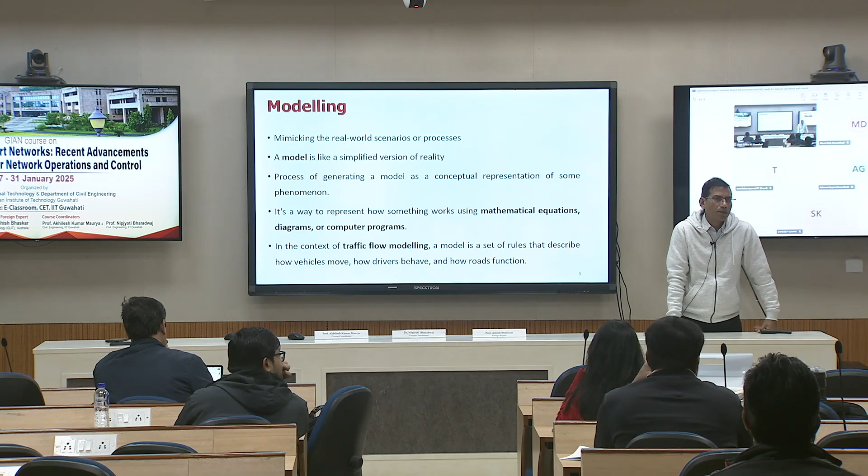Now the next question comes: if this is modeling, then what is simulation? Because these words sometimes come together or separately, but most of you, if you are aware of models, always encounter the word simulation as well. Yeah, one by one. Yeah, please. This is also a virtual environment, or maybe, I don't know, do you consider a computer model virtual or physical? The form of animation, but here in modeling, we mostly solve mathematical equations.

So modeling, even physical modeling also might be modeling. So simulation, you are saying, we do in the virtual world. Virtually, we solve the problem by defining the environment perfectly. And mathematically also, whatever model we describe, the same definition. So what is the difference? The first question is whether modeling and simulation are different or the same. If they are different, what is the difference? Testing the model. Using the model is

Maybe okay. Yeah, madam. Many of these are not working, I think charging is not there or something. So even these two are not working. Maybe you can just check. So

Testing the model. Okay. Anybody else? Basically applying it so many times that we get results that are real time. That is calibration, not simulation. It's like you want to fine tune your model so that it matches. Create some conditions similar to the real world so that the model works well. So that is the model also. If it is not mimicking the real world, then it is not a model. Yeah, but the external conditions will be given to that. That is simulation, like traffic flow propagation. Okay. Anybody else want to answer?

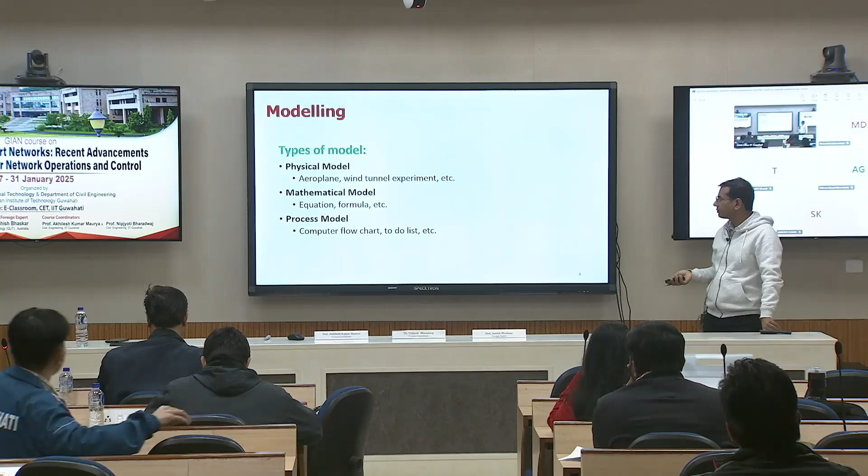Then mathematical model: you are very much aware that all this traffic flow modeling is nothing but mathematical modeling. Then process modeling. Whatever coding steps can be another model, but that is in the form of flowcharts and rules. Sometimes your model may not be either of them, but a combination of those, some physical, some mathematical, both together. But our traffic flow model mostly belongs to mathematical models, where we mathematically try to develop some kind of relationship between different components of the system.

What are the three components of the traffic system? Driver, roads, and vehicle. So how they interact with each other, we try to express in mathematical terms. That becomes our mathematical model.

So if you want to study a system, either you can experiment with the actual system and learn how the system is responding, or you can create a model and then experiment with it. If you are able to create a physical model, you experiment with the physical model, or you develop a mathematical model and then test that model in different scenarios. And these two terms will come back later.

Sometimes with this mathematical model you can easily get the answer by solving it with an analytical method, using some kind of analytical tools. But sometimes it is not possible. Why it is not possible, when it is not possible, and how simulation comes into the picture, that we'll try to see. We'll skip this. So we'll try to understand what simulation means.

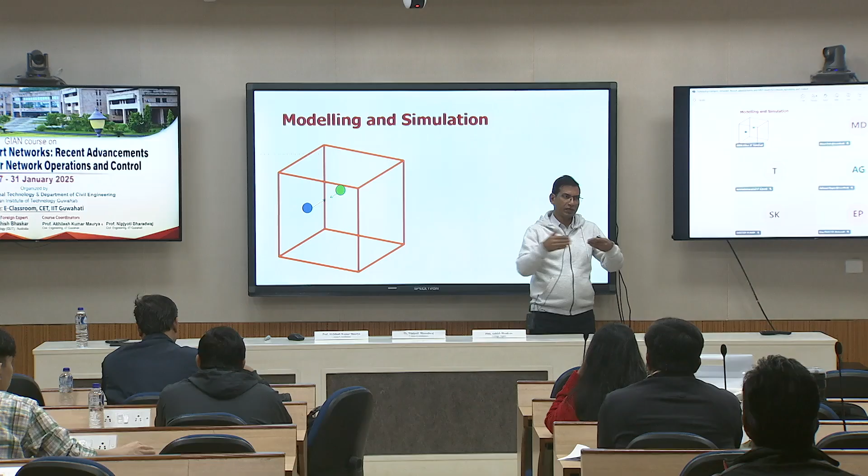Now, say this is a transparent box, all the sides of this box are perfectly elastic, and the elasticity coefficient is known. Even the balls' elasticity coefficient, initial position and speed are known. Now, if we shake this box by a known force, the balls will move, and they might collide with each other after some time and rebound back. How to get their position?

For that, well-known maths is available; dynamics equations are available. If you know the initial condition, we can figure it out very deterministically if all the parameters are known. So this is not a simulation, because here you are able to get the answers mathematically by directly solving these equations using an analytical method.

What will happen if we add a few more balls, maybe one more? Can we write equations for all three? We can. It's easy to write equations for three. If we add four, it's slightly difficult, because now there are too many permutations and combinations. They might collide with each other as well as with the box surface, so the number of equations is increasing. If we keep on adding more and more, then solving those equations all together

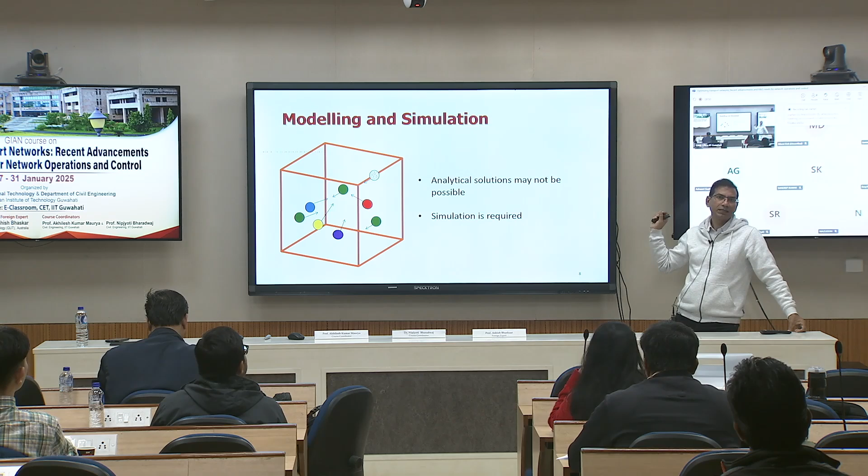Now if you consider the traffic system, we had three basic components: road, vehicle, and the driver. But it's not that only one vehicle, one driver, one road is there. There are thousands of vehicles simultaneously interacting with the road. Even the road neighborhood will keep changing. If you keep moving, your road surface will change, neighborhood conditions will change, shoulder dimensions will change, weather conditions might change if you travel larger distances,

or maybe the geometric design will change. So a lot of variability in terms of road, a lot of variability in your neighborhood, there might be different varieties of vehicles you will keep interacting with. So once the number becomes significantly high, you cannot solve those systems by analytical methods, and simulation becomes more realistic. And here visualization is another addition. You can visualize how the system is behaving, and then it becomes easier to appreciate.

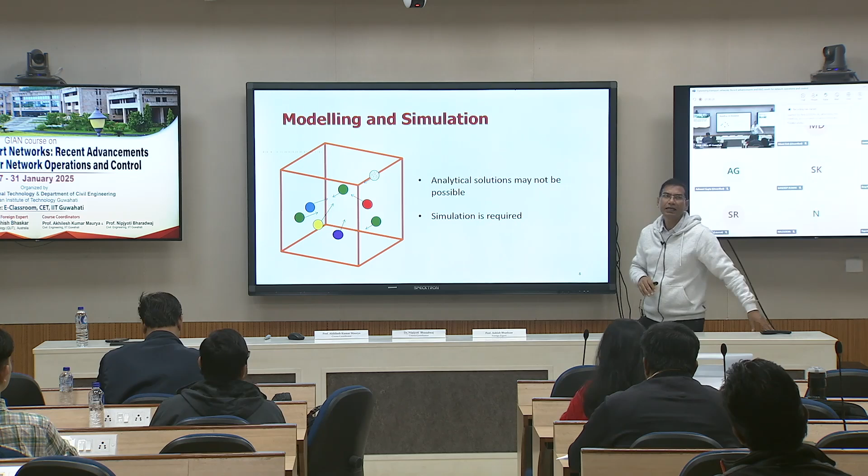If you see how vehicles are moving in a particular simulation model, you will be able to visually check whether the movement of vehicles is close to reality or not. If it is close to reality, you can believe that at least at first glance things are fine, vehicles are not running over one another, they are not taking abrupt lateral shifts. All those things can be very clear with the visuals. Okay.

Then these can be of different types. You can have a static system where behavior does not change. Whatever the behavior is initially, it will not change over time, it will remain the same. But you can have a dynamic system where things get changed, like the driver behavior may change, or the road surface keeps changing. So if a vehicle is moving at a mid-block section, as soon as it approaches the intersection, behavior might be different because the road component behavior has changed.

Then you can have deterministic and stochastic, discrete and continuous, we will talk about. So this is static and dynamic we have talked about. If any parameter keeps changing over time, then it becomes a dynamic system. Traffic is one such dynamic system. It's up to you what you are looking for, whether you are looking for the impact of road geometry, maybe a wide road, then a narrow road, and you want to study how congestion is forming. Then over time things will keep changing.

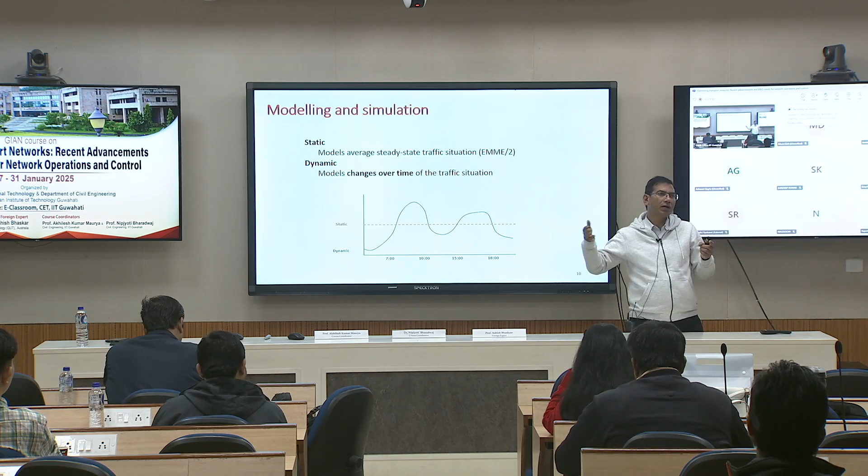Or maybe if you want to study driver behavior and aggressiveness, if it changes from morning to evening, that also you can incorporate, and over time you can see how much impact will happen because of the change in driver behavior. So then that becomes a dynamic system. Stochastic and deterministic: where you are able to predict the behavior very accurately, that becomes deterministic. Wherever that situation comes, the answer will remain the same.

But is the traffic system a deterministic system? No. Why is it not deterministic? Every second there is change. So which component is more responsible for that, out of the three components?

Vehicle may not be, because if you apply the same amount of pressure, most of the time the deceleration generated might remain the same. Over time, maybe over years, it may change, but not within hours. But driver behavior will definitely change, and the driver cannot have very precise perception.

If I ask 10 people how much distance there is from that place to this place, they will come up with 10 different answers, because that depends upon their perception capability, how accurately they are perceiving. If they are not able to perceive the distance accurately, how can you expect that they will react in a similar way? So based on their perception capability, their reaction will keep changing, and once you try to guess the distance, you know that you need to decelerate harder or maybe milder, but you don't know the exact value of how much pressure you need to give.

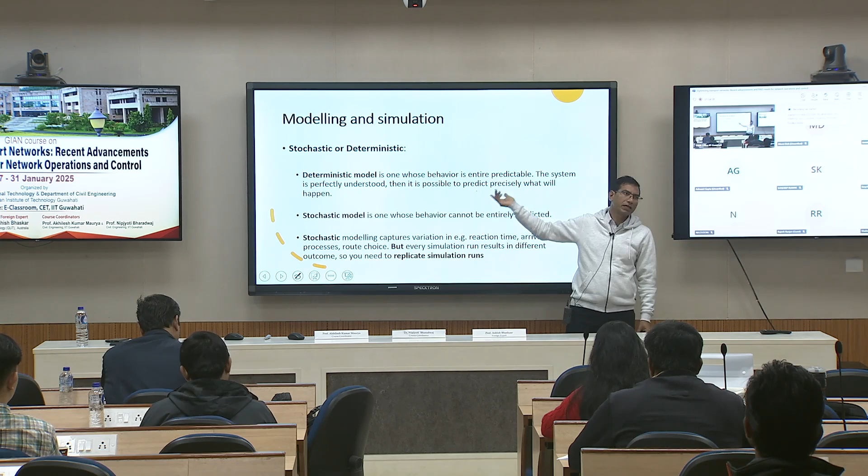When you try to press the accelerator, sometimes it might be slightly on the higher side, sometimes slightly on the lower side. So the idea of discussing this is that if you expose the same driver 10 different times to the same scenario, he might react differently. So it cannot be a deterministic model. Whatever model you are going to develop, if it has that kind of deterministic relationship, it is difficult to represent the real world traffic stream. It might represent it with a lot of simplification.

Then continuous and discrete. Sometimes if you want to simulate the traffic stream and your objective is just to get flow at a particular location, you may not require updating the vehicle position every 0.1 second. Maybe every 5 seconds or 10 seconds is also okay, unless you start introducing some kind of error into your system. In that case continuous evaluation of vehicle position you may not require. So you will update the system at discrete intervals of time, and your system becomes discrete in time.

It's like you are standing on top of a high-rise building and seeing the traffic stream. You are opening your eyes, seeing, and closing them for say half a second. Again you open. A vehicle is currently here; next time you open, it is here. Whatever happened in between may not be of your interest. But if you are studying an accident scenario, where everything happens within a fraction of a second, you might require even 0.01 second or whatever minimum is possible, because every moment is important. That will be more or less continuous, but here it might be discrete in time.

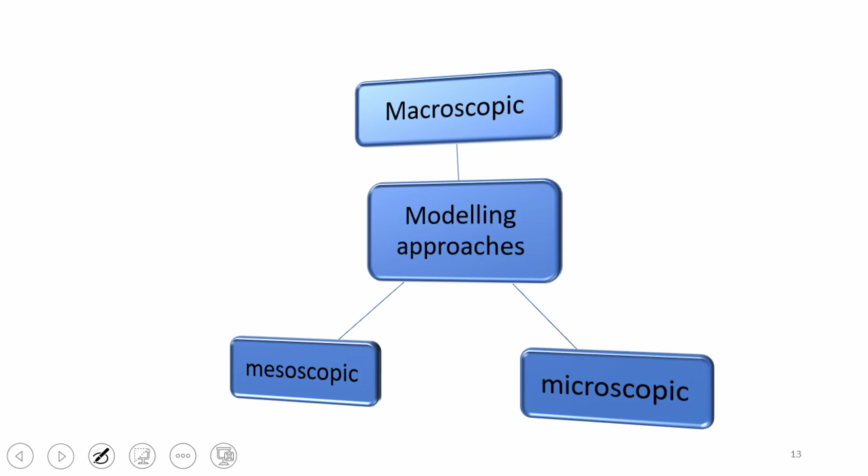Then, as Professor Bhaskar has already discussed, you have macroscopic, microscopic, mesoscopic; yesterday he talked about mesoscopic. When you look at a very aggregate level, seeing the traffic stream from an aeroplane or a very high-rise building where you cannot distinguish vehicle to vehicle interaction, you see a group of vehicles. Whatever parameters you observe there come under macroscopic. At the aggregate level you try to understand how vehicles behave: if density is high, whether speed is low or high. Acceleration and deceleration will not come here; mostly you talk about speed getting slower or higher.

Then at the micro level, you are standing just beside the vehicle and able to identify each and every vehicle's interaction: how much the gap is, what type of vehicle it is, whether it is accelerating or decelerating, the exact speed of that individual vehicle. All that information is known and you work with those parameters. That is the microscopic level. Most of today's class we will discuss the microscopic level, and sometimes you require even finer detail, for accident mechanism or accident reconstruction and how the vehicle is performing. The moment you press the accelerator, different in-vehicle processes might happen.

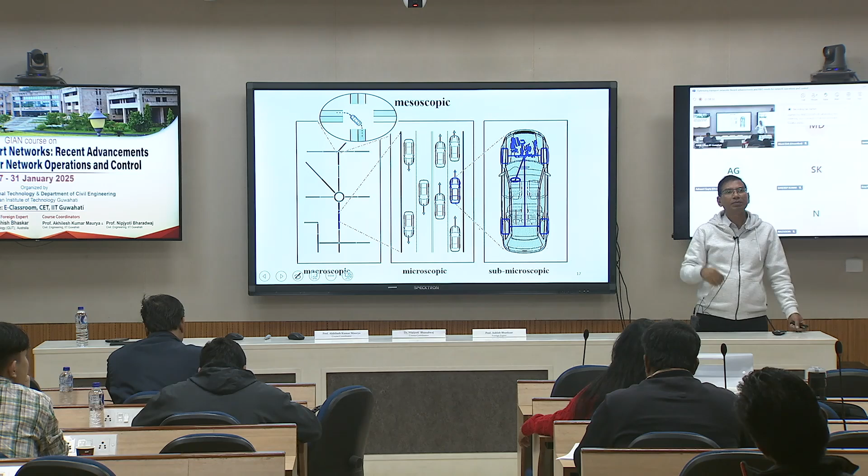Before actually that brake gets applied. So if you want to study that kind of system, within the vehicle itself, you will be studying many other components. So it becomes an even finer level. And mesoscopic is already known to you. It is in between macro and micro.

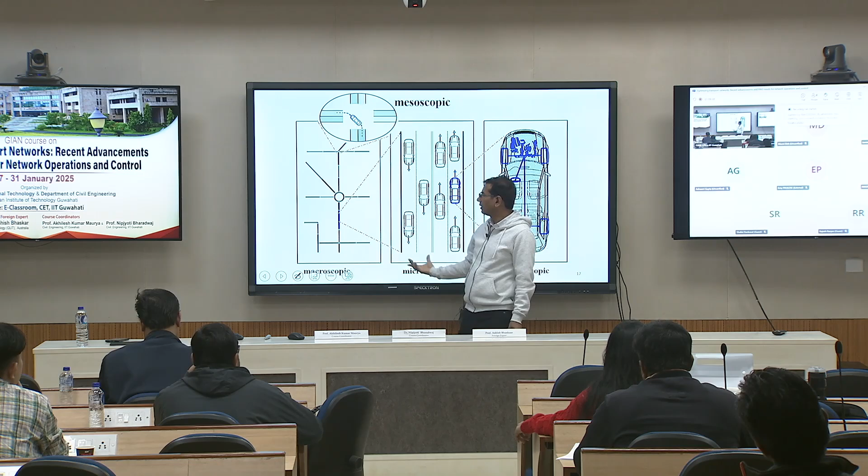Say you want to figure out only how many lane changes happen. You are not bothering about the individual vehicle, only the number of lane changes. Or at a particular intersection, what is the turning proportion, like left turning, through vehicles and right turning vehicles. For all those calculations at a moderate level, you may not require this much detail. You require slightly more than this. So then you go with mesoscopic.

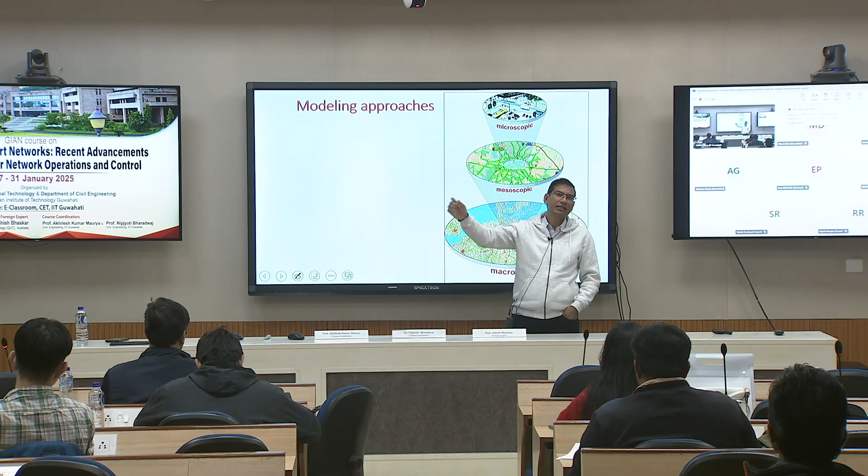Sir, what is the difference between simulation and forecasting? Simulation and forecasting. So you can use simulation to forecast. Forecast means you are interested in what is going to happen in the future up to a certain time, and that you can get using simulation, using mathematical equations, anything. So what is going to happen after a certain time interval in the future, what the scenario will be, that comes under forecast.

Is it that in forecasting, a researcher comes to know of a behavior which he may not know initially? I mean, the behavior may exist in actual reality, but since he may not be aware initially, he comes to know about it, and then he can test it in the field.

Yeah, normally if you are predicting the system behavior just after 1 second, that is actually not forecasting. We normally use forecasting once your time horizon is reasonably large, which you cannot easily anticipate. So then using some kind of properties, either using simulation or some kind of factor, you might be trying to predict what will happen in the future.

And mostly you can use forecasting for usual routine events and non-routine events. Say you see that on a particular link, this is the traffic today. Using a growth factor, you can figure out after 1 year, 2 years, what will be the appropriate flow values in that network.

So that is one. Another is, if you have a traffic condition prevailing right now, how fast congestion will occur, or if you are working on a signalized intersection, you might be interested in at what time the queue length will reach a particular threshold. That kind of thing can also come under forecasting, but short term. So does this answer your question?

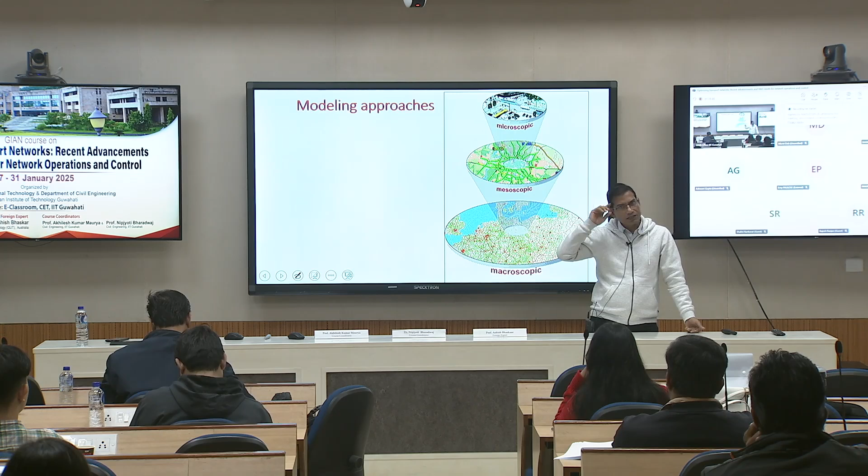So if he has to mimic the behavior, say an actor, if he has to copy a particular actor, he has to get his walking style, his speaking style, body movement. Unless he copies that, you will not identify him as that actor. So he has to copy those. Whether he is copying 2 factors or 10 factors or 20 factors, the realism depends upon how close it is. Thank you, sir.

Yeah. Any other question? Okay.

So this is well known. At the microscopic level, we have parameters like time headway, individual speed and distance headway, and at the macroscopic level we have flow rate, average stream speed, and density. So if we talk about the macroscopic level, which fundamental parameters do you think a driver might be able to perceive out of these three? Speed. This question is for non-IIT students. You people know, I know.

So these are three. Which one do you think people can perceive? Density. Okay, so he said density. Any other parameter? Speed. Speed. Okay. Flow rate. So once you are in a stream, which of these parameters can you guess, or perceive and react to? Flow rate also.

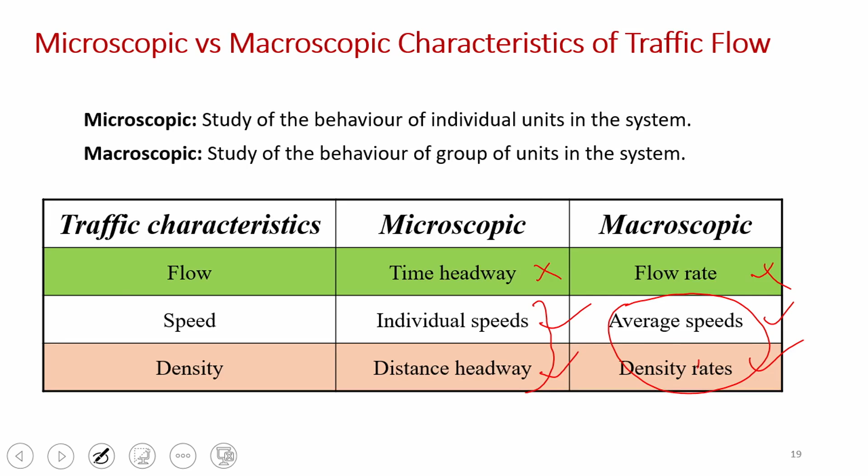Then, when the macroscopic relationship was being developed, people first plotted all the observed data between speed and density. They saw that an inverse relationship exists, and then a lot of models have been developed to fit that observed data. So there are a series of models; I had listed only a few. We'll not go into the macroscopic, but all the effort is how best you can fit this fundamental diagram. And this fundamental diagram is speed and density, because these two can be perceived by the driver. It's not speed and flow. Speed and flow derives later on.

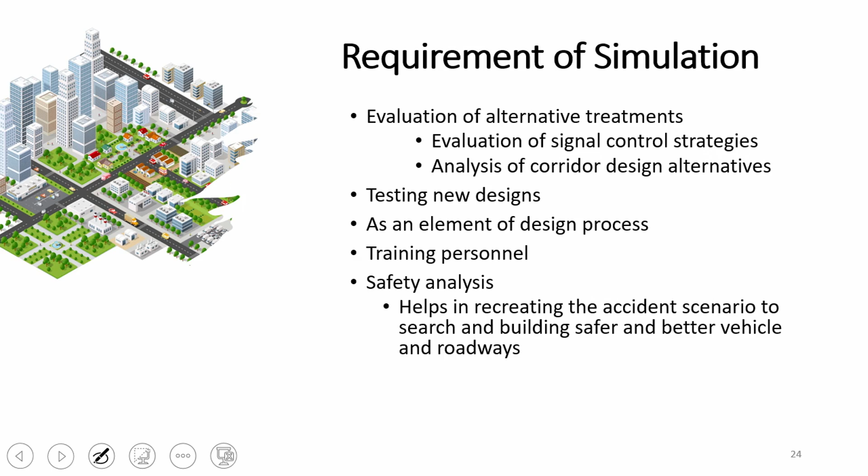Then why do we require simulation models? If you want to do some kind of treatment, say you had designed an intersection, you cannot install signals and see whether it is performing okay or not, or build a rotary and see whether it performs okay. So instead of physically building those structures, you need a simulation model where you can experiment. Or if you want to test some new innovative strategy, like innovative intersection designs where continuous movement happens without stopping, you cannot build them on the ground and test, because there might be risk involved. If an accident happens, who will take responsibility? So initially they get tested in a simulation environment, because you believe whatever relationships you built are realistic, so the results you get through simulation might be realistic.

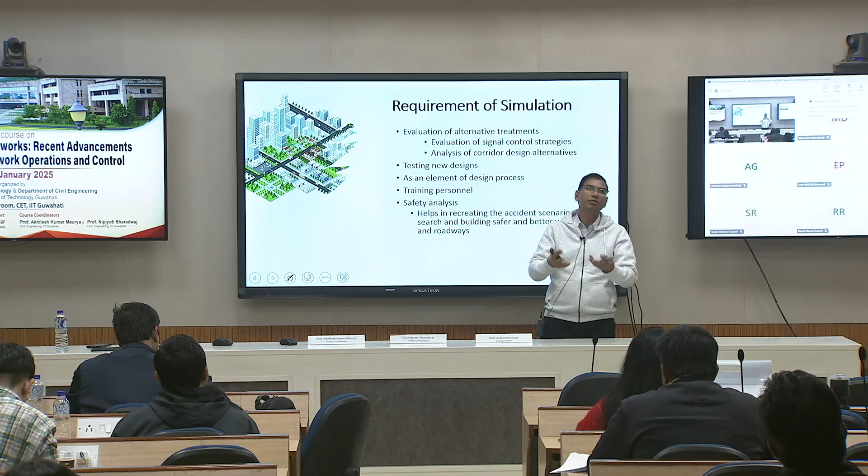Then many other things, like accident reconstruction, can be done through this, because once an accident happens, you cannot ask them to recollide and watch. And many times you don't have the video either. So how to know what the scenario was before the accident? Based on the data available, you try to guess the possible scenario and try to model that collision, and you check whether the outcome of the model is similar to what has been observed. If it matches the existing outcome, you can guess that your assumptions might be the real assumptions.

Okay, then before going into simulation, maybe we can see some videos of simulation, so that we can realize it.

There is no keyboard. So how to go back from the slide? Oh, the keyboard is there. Okay, thank you. Okay. No.

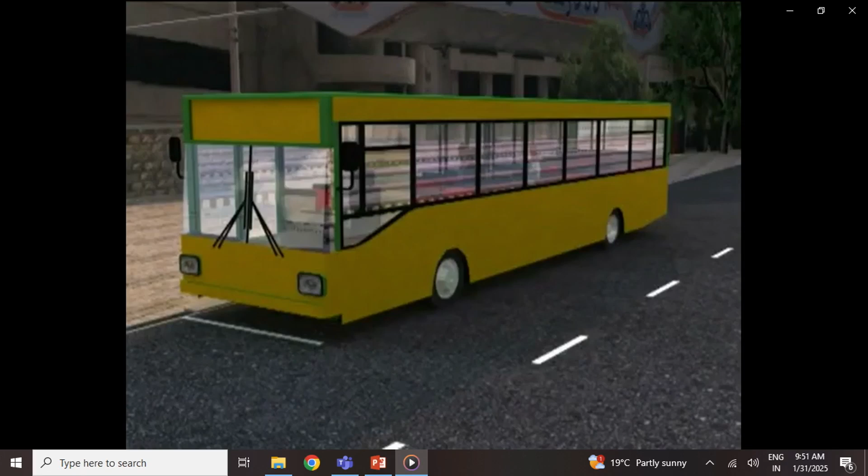So now this is the simulated network. This visualization helps you evaluate whether the relationships we built and the gap acceptance algorithms we included are appropriate or not, and then you can change the infrastructure and see whether you are able to increase the capacity. If we put BRTS in the middle or on the shoulder side, what kind of complexity are you going to face.

Okay. So how many of you are working in simulation? Maybe that experience is still there, no? You have not forgotten. So people who are working in simulation can very well connect with that. These videos are for those people who are not working in simulation, to show how your simulation animation will finally look if you do it for an entire network.

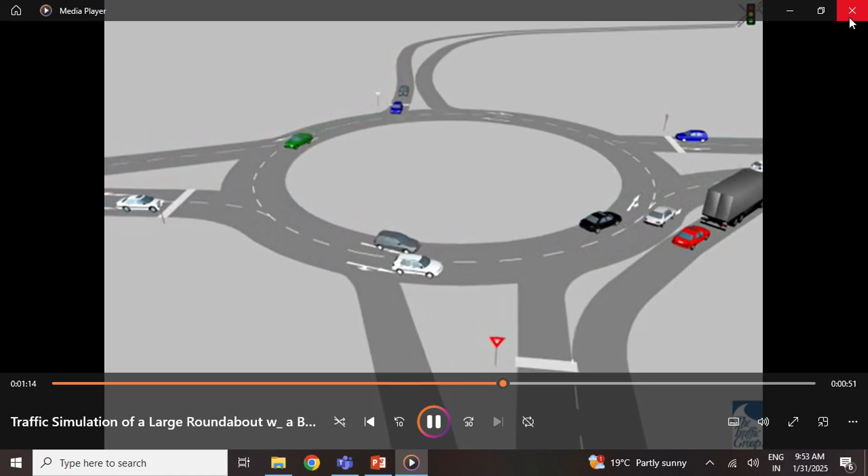Then we'll go to some other type of simulation, where they simulate a large roundabout. You can see how vehicles are flowing. All these are taken directly from VISSIM, so they might have a right-hand driving rule instead of left-hand. Okay, so this way you can easily figure out what could be the capacity of a roundabout at a particular location. But this is lane-based traffic. Similarly, we can develop the relationship for non-lane-based traffic also. So this is one example where you can have an Indian kind of traffic stream.

So the idea here is that if you see this kind of visuals, at least we can have some confidence that it's a little close to reality. Here cows and those things are not there, so you cannot have 100% reality, and there is no encroachment, which is another feature. And many times we blame that our road is narrow, but because of small patches of local encroachment, the capacity of the network goes very low.

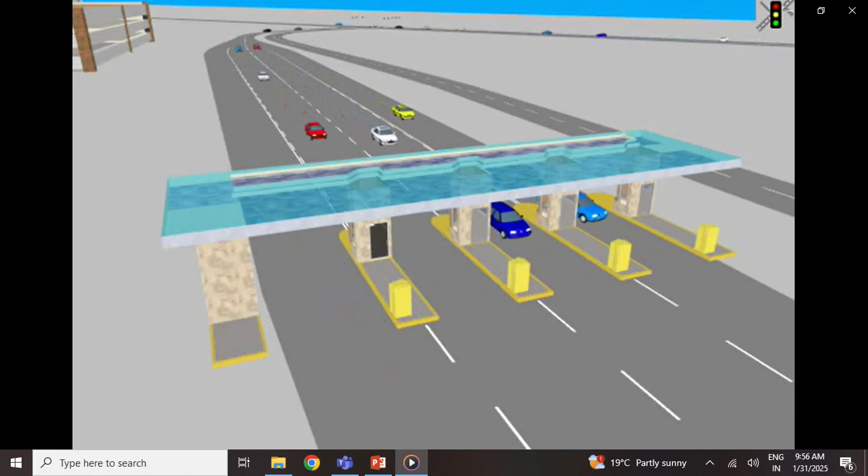Behind these visuals, rigorous mathematical equations are there, which will keep updating the vehicle position and keep deciding whether they will shift to lane 1, lane 2, lane 3, how far they will stop here. You need to have the real data from toll collection, like minimum how much time they take, maximum how much time they take, how it is distributed, and then randomly you are assigning the service time to each of these vehicles. So all those nitty-gritty details come from the field, and then this simulation will look like a real one. Otherwise it will not look real. It might look more like a game.

Okay. So the benefit is that if you had this, you can figure out whether 4 toll booths is correct, or you need 6 toll booths, without constructing on the ground. Maybe then we will have just the last one.

Okay. So with VISSIM, even if you want to calibrate VISSIM parameters, you need to have a separate tool where you will be changing the parameters and running VISSIM again and again, getting certain output, either in terms of speed distribution or travel time distribution, vehicle composition, traffic flow volume, and keep matching with the observed one. So until it starts matching the observed one, your calibration is not complete. So you need to do that iteration multiple times till you get your calibrated parameters.

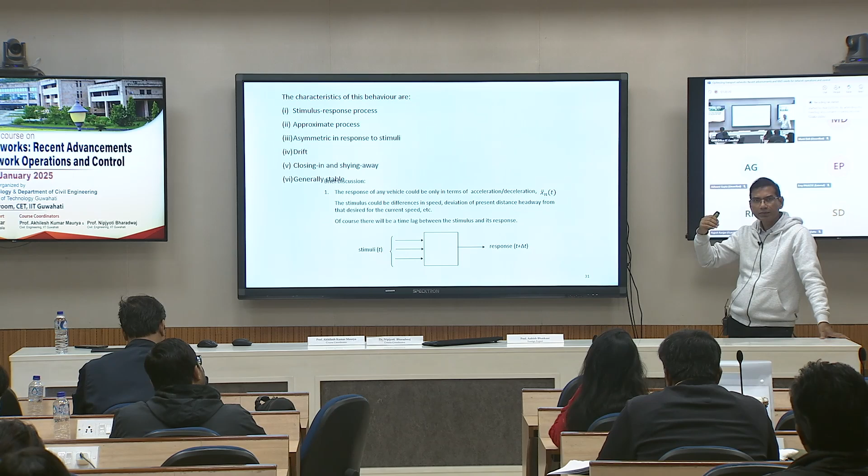So that kind of equation is very simple. Achieve your desired speed depending upon your aggressiveness level. If you are very aggressive, you will quickly achieve it, otherwise you will comfortably accelerate and achieve it. But in the other case, once another vehicle is there, that situation becomes a little bit complicated, and people have observed and listed these few behaviors which should be reflected in a real traffic stream.

The first thing is called the stimulus response process. This car following behavior is a stimulus response process, meaning you will keep observing some parameters and keep responding to them. So these parameters can be anything. These parameters can be your... just a minute.

So these parameters can be your distance headway, relative speed, next vehicle speed, anything. But you will be continuously perceiving that and reacting to that. But in this process, once you are perceiving some of the parameters and reacting to them, there will always be a delay. And that delay plays an important role: you will perceive, process it, react to it, so there will be a delay equivalent to your perception reaction time.

So every time, whatever parameter you observe, you will not react instantaneously. Your reaction will come after delta t time. So this is one clear behavior which any simulated model should reflect. Their reaction should not be immediate.

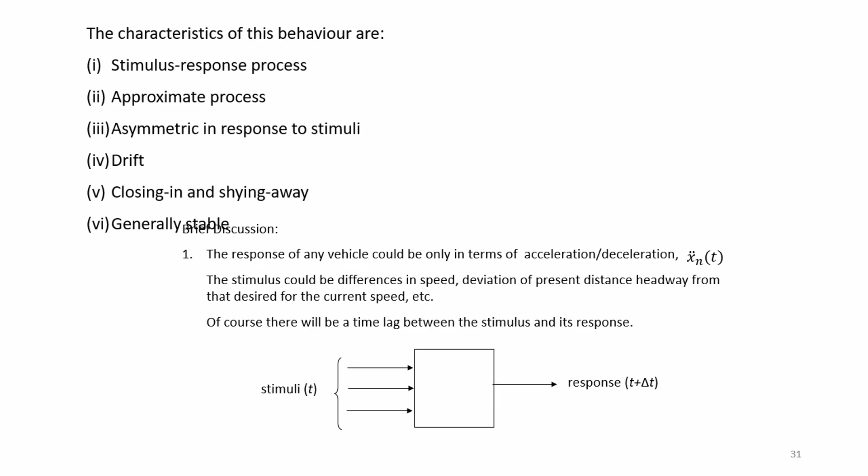So in that case, he will be perceiving the parameters and trying to react to them. And in this process, his perception will never be very deterministic. He will guess what the distance headway is. He will guess the relative speed, because he does not have any data on the speed of the leading vehicle. So it depends upon his guess whether the leading vehicle is accelerating or decelerating. That is why the brake light concept came, because if the leading vehicle is decelerating at a very small rate, like 0.5 meter per second square, you may not be able to perceive it unless you are very close.

But as soon as you start decelerating, your brake light is on. So that is additional information to the following driver that the leading vehicle is definitely decelerating. And once it's decelerating and you are moving at the same speed, it means that is a risky situation. If you don't do anything over time, you are going to hit that vehicle. So you get that kind of information, but you don't get at what rate it is decelerating.

Okay. So currently one debate is going on in the research community, whether we should have a variable brake light, some kind of indicator: 30% braking, 60% or 100%, depending upon brake intensity. But we don't know whether that is going to help the following driver or not. It might, it may not. So somebody can try this.

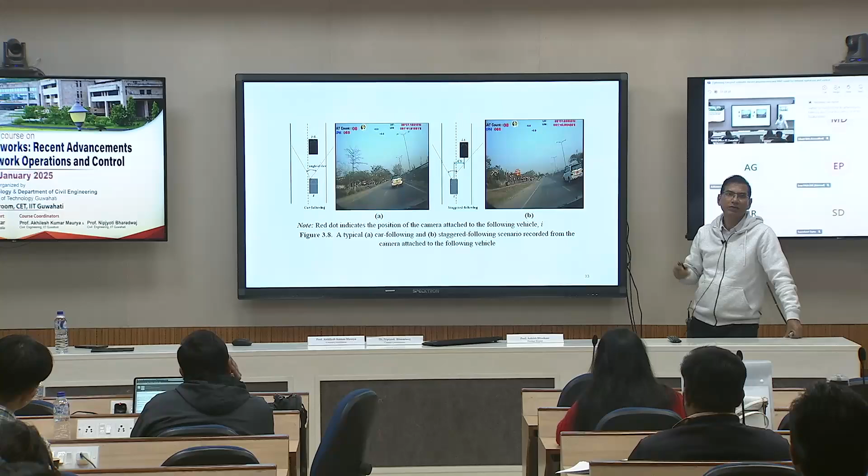So after some time it starts catching up. But there is a time difference, and that is actually perception reaction time. Similarly, if you see deceleration, the leading vehicle started decelerating, so that's why the relative speed becomes negative. So here, because it decelerated by a significantly large value, the following vehicle reacted quickly, but there is a time difference.

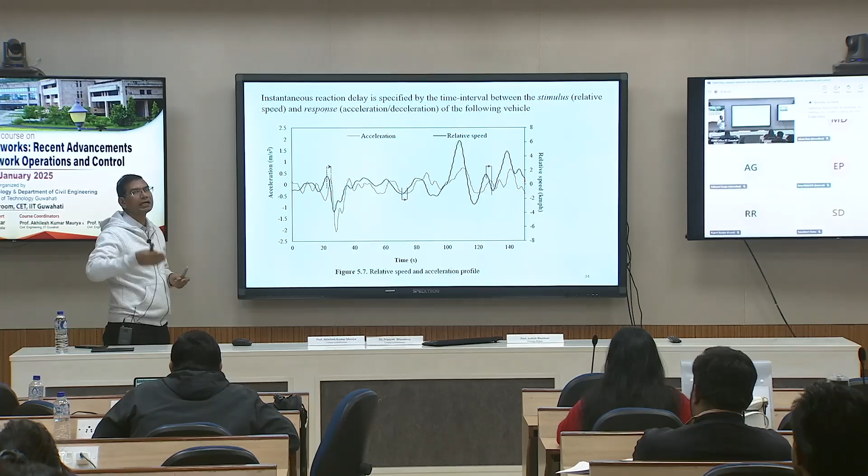So this is clearly observed if you draw these actions of the following vehicle and leading vehicle. From this time gap, you can figure out such instances, and you can figure out what is the reaction time of that driver. Okay, so these are a few values, we can skip this.

Then we are talking about the response to different stimuli, the driver response. If the leading vehicle is accelerating, the distance headway is increasing; in that case the response, versus if the leading vehicle is decelerating and your space is decreasing, that response. In both cases the response is not the same. Not the same, we are not talking in terms of magnitude, but in terms of sign: in one case you need to decelerate, in one case you need to accelerate.

Say the relative speed in one case is plus 10, meaning the leading vehicle is moving 10 meters per second or 10 kilometers per hour faster, and in the other case 10 kilometers per hour slower. In both cases the magnitude of the way you react will not be the same. Once the relative speed is negative, you will react harder, because you are going to hit that vehicle. So here you will be more sensitive, you will act quickly, and at the same time you will react harder, versus when it is moving faster.

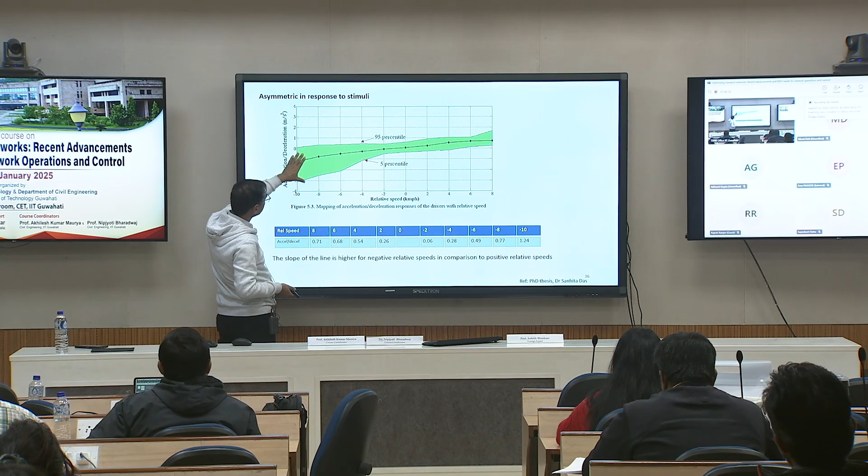So with the relative speed in the same experiment, we try to figure out the following vehicle's response, acceleration and deceleration. Here you could see a similar kind of relative speed. In one case, when it is -8, the response changes from this range to this range. When it becomes +8, the response is much smaller, because why aggressively accelerate? We may not feel that kind of urgency. Even if we accelerate comfortably, nothing is going to happen.

And this is the real behavior you will observe: in the deceleration case, or in cases where space is going to decrease and create a threat to your safety, you will be more active. It is even observed, if you noticed in that graph, that in deceleration the reaction time is small. The driver reacts more quickly in the space decrement case than in the acceleration case. So these are some of the observed facts from the real stream, which the model you are going to use to simulate should also reflect.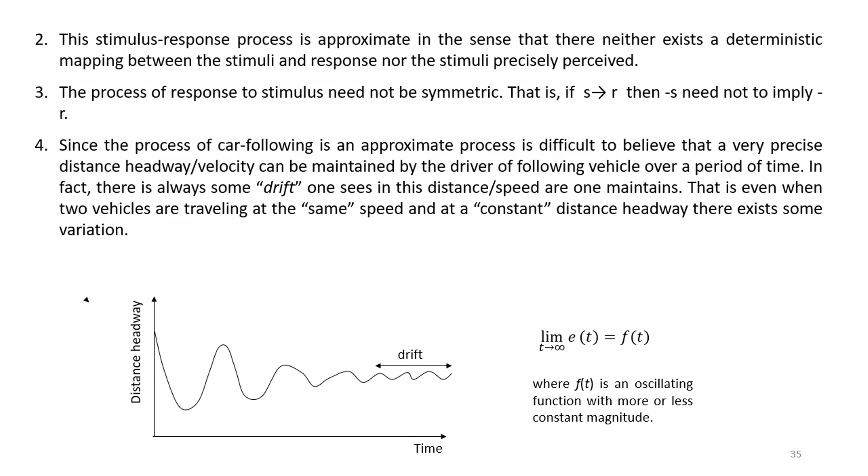Then, one more important parameter is drift behavior. If you ask two vehicles to follow each other, suppose the leading vehicle's speed is somehow fixed, by some mechanical means, so this vehicle is moving at 40 km per hour. Now you ask the following vehicle to maintain the same speed. What will be the scenario? What speed will he be moving at over time? The leading vehicle is fixed at 40, and the following vehicle is manually driven. What will be his speed?

Less than 40? If it is less than 40, then the distance will keep on increasing, so over time it becomes 500 meters and 1 kilometer. What's the objective? You have to follow the vehicle. The leading vehicle is moving at 40, and 40 is obviously not your highest speed; your highest speed might be 80. Whenever you get the opportunity, it is anticipated that you will try to achieve that highest speed. So in that experiment the leading vehicle speed is fixed, it's not changing. The question is, what will be the following vehicle's response? At what speed should it move?

Sometimes less, sometimes more than 40. Sometimes if it is traveling at less than 40 and the distance is more, then the speed will be more than 40 so that it can overcome that distance. Never cross 40? If it never crosses 40, then the gap increases. It will oscillate for sure. So it will oscillate like this.

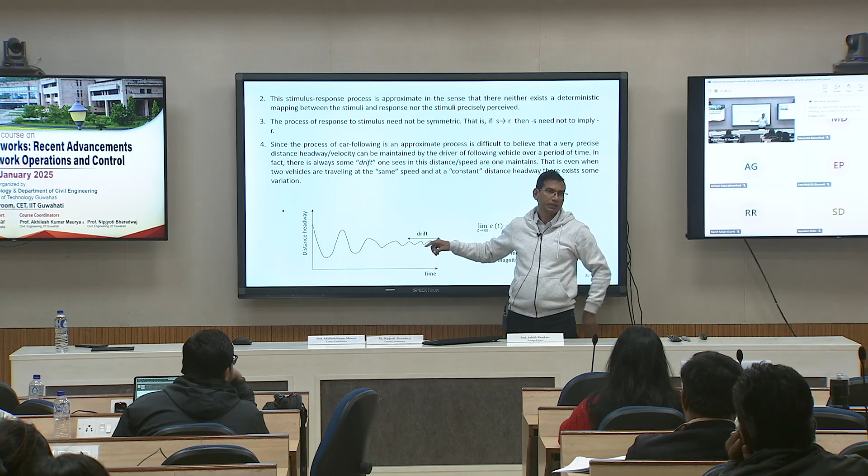So you will try to maintain an average speed of 40. But in order to maintain that average speed of 40, because again you are human, if you feel that the distance is increasing, you know that now you are moving slower. So you will accelerate. But you don't know when your speed becomes exactly 40. So you might go to 41, 42 and then you will see that the distance has been reduced. Again you start decelerating. So your average speed might be 40 but you might be ranging from 38 to 42 or maybe 35 to 45 depending upon your perception capability.

So this variation will be different for different persons. Somebody like a Formula 1 racer might be very much able to precisely figure out when he is moving faster and when he is moving slower. So he might be at maybe 39 to 41. But this band will always be there. This band they call drift. So here the following vehicle will never be at constant speed even though the leading vehicle is at constant speed. Some fluctuation will keep going on in reality, and that is because of the perception capability limitations of the human being. And we'll see that all of VISSIM is based on these perception capabilities, this fluctuation.

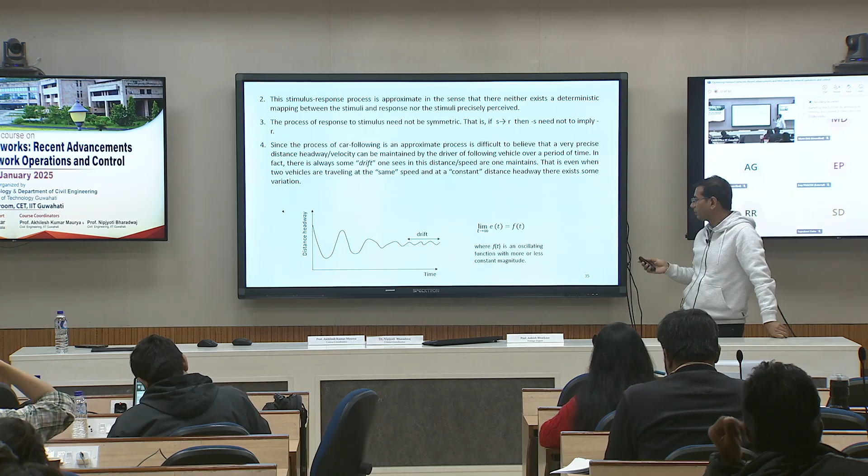So we all experience it, right? Yes. If you drive on highways, sometimes it might be milder. If you are moving at 80, this drift will be smaller because you are already at higher speed. There you don't mind even if the gap increases a little bit. But once you are constrained, you will desperately try to maximize the speed. So here drift will be higher. But this drift will be there. So maybe next time you drive, try to see whether that thing is happening or not. Then you will be able to correlate better.

Now we'll talk about some philosophy, which is actually the philosophy of VISSIM. Although we'll keep talking about VISSIM, it doesn't mean I am a VISSIM representative. I'm not from PTV. It's because we have worked more on VISSIM and we find it has better capability to represent the Indian traffic stream than AIMSUN and many others, which are more lane-based. So that is why you will frequently see the VISSIM name come up.

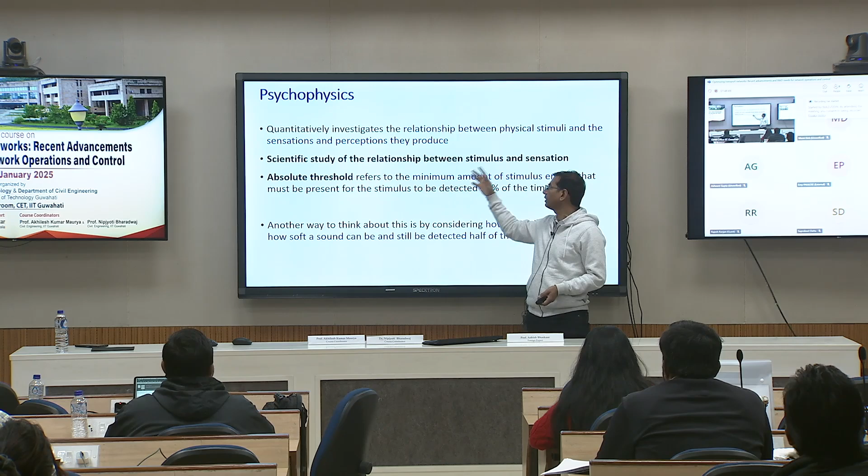There is a concept called psychophysics, which talks about the quantitative relationship between physical stimuli and sensation. This is a little different from whatever we are talking about in traffic flow. This is a kind of absolute threshold where you are able to perceive some activity 50% of the time. Say if I just drop a blade from here, even with pin drop silence, sometimes you might be able to hear it, sometimes you may not. We assume the noise created is of that level that only 50% of the time you are able to perceive it. That becomes the threshold. If the noise is more, you will be able to perceive it more times. The area which deals with this kind of thing is called psychophysics, and there are many such experiments.

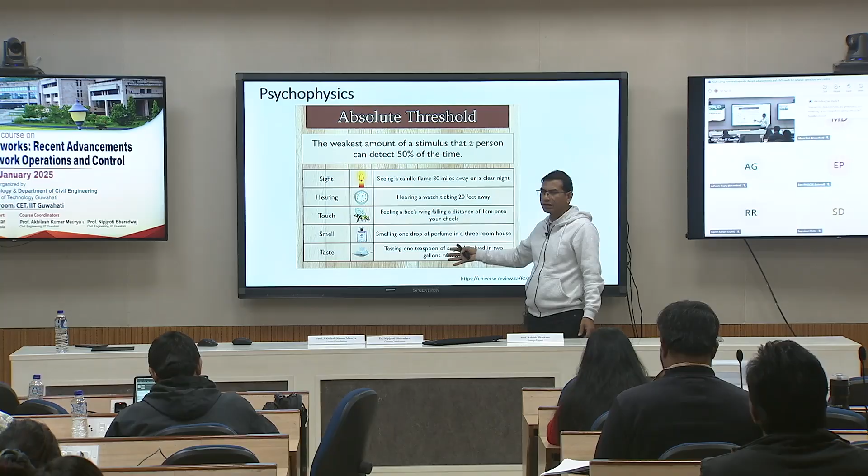Maybe if you have a candle and you keep moving so far that from that distance sometimes the candle is visible, sometimes not, that becomes your threshold, where 50% of the time you are able to see it and 50% of the time you are not. It doesn't mean the candle is not there; the candle is still there, but that has become your limitation that you are not able to perceive. So this becomes the threshold of your senses. You are playing with extreme conditions where sometimes you are able to perceive and sometimes just not. Similar thing with hearing, touch, smell, all senses. There is some threshold.

The idea of discussing this is that all drivers are human beings, and all the information you gather for traffic comes through your senses, and these senses have certain thresholds. Mostly we will be working with vision or sight, because whatever distance, whatever things you are perceiving, most of the time you will be perceiving through vision only. Now let us take an example where there are two cars.

So they are moving on a particular road, a single lane road, where no overtaking is possible. Initially the distance between these two vehicles is L. Assume that this L was like 1 kilometer, initially so large that you cannot perceive. In that case maybe your speed is currently V, and maybe this might be moving more than V. So this V2 is much higher than this V1.

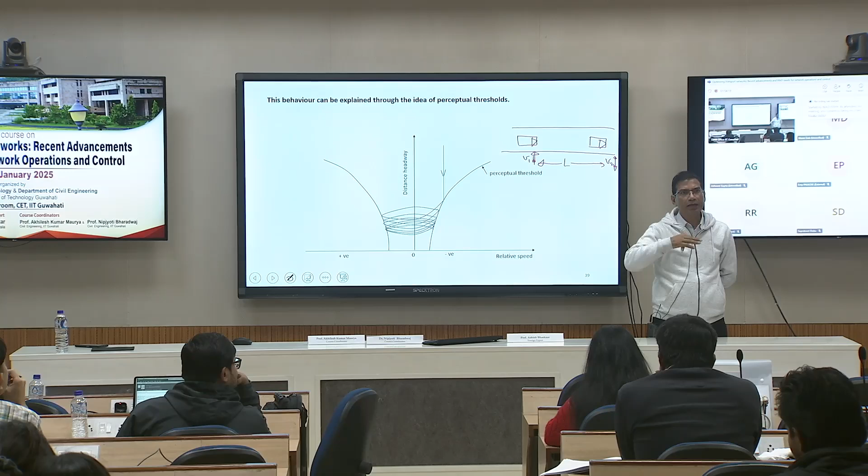Sight distance means stopping sight distance, say 200 meters. So will you be able to perceive that 200 meters has been reached or not? Does the size also matter? Because when it is very far, and then once it becomes closer and the size becomes bigger, your perception will be more precise. Even when it was 1 kilometer, you were able to perceive it, but vaguely. As it comes closer, your accuracy will increase.

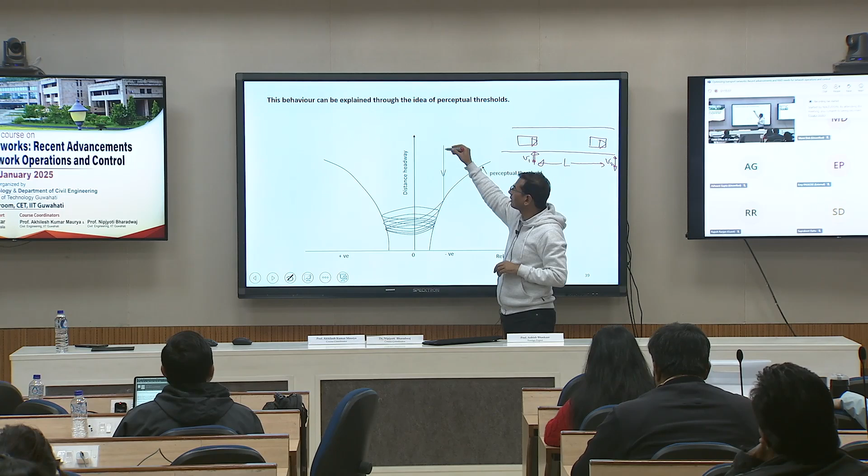If somebody asks how much this distance is, you will obviously not say 1 meter. But from here to here, your error might be in the order of meters. If things are closer, the error will obviously be lesser. But there will be some point where you realize that now this is dangerous: I am moving faster and this is moving slower. So initially the driver is not realizing, and the distance headway is decreasing because of the relative speed. There might be some point where he realizes he has to take action.

So what action will you take? Decelerate. If you start decelerating, what will happen? Relative speed will also decrease. Relative speed decreases, but you are still moving faster, so the distance headway will still keep decreasing. Here relative speed becomes 0 at this location. But will you be able to perceive that now you are moving exactly at 40?

That's why we had discussed it earlier. It's just not possible to realize that now I am moving at exactly that speed. There will be some perception error, so you will keep decelerating. If you keep decelerating, what happens? Your speed becomes slower, the leading vehicle's speed is now faster, so the distance will start increasing. You will start moving in this direction and the distance starts increasing slowly.

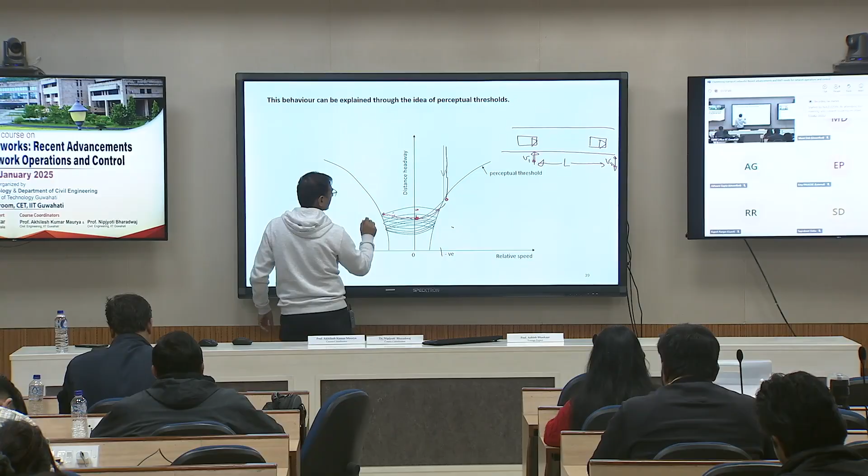then again, still you are moving slower, so distance headway will start increasing. Again it becomes 0 here, but again your perception capability comes into picture. You will again switch to the other side. So you will see that again you will be doing this. So this cycle goes on.

So over time, initially this variation might be large, but over time you will be able to fix some location or some range where you will keep changing. So some amount plus, some amount minus. So this becomes your drift. Here you are changing the speed because relative speed exists. So this is actually your drift. Beyond this, you cannot precisely perceive.

And what are these lines? If you do this experiment, this is for one driver. If you do 100 drivers, for driver 1 this was the threshold, for driver 2 there might be this threshold, so there might be different thresholds. You may get this kind of front where people are making the decision or people start perceiving. So this is called the threshold.

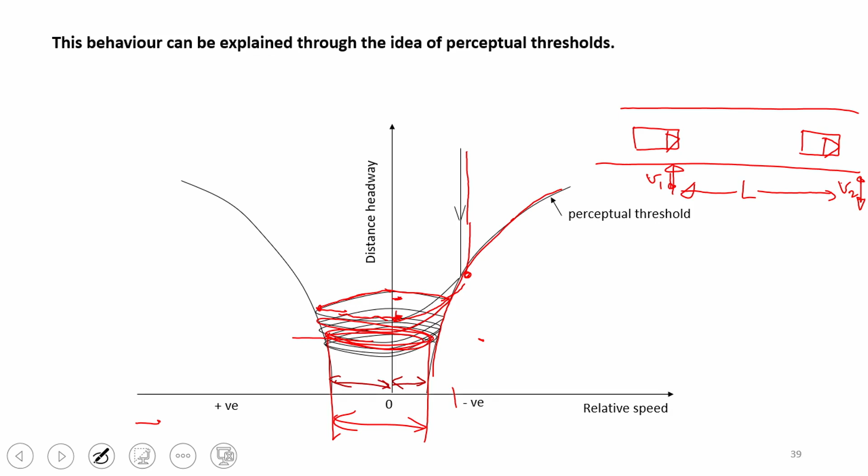So this distance versus this distance, this is smaller, and it's not by mistake. Why is this smaller? This side is a smaller threshold, closer to zero, and this is larger. Why is it like this? So we talked about it, it's not symmetric.

You behave differently in the deceleration case, and differently in the acceleration case. In acceleration you are casual, so your perception errors are more. In deceleration you are more cautious, so your perception errors are less. So this is less, this is large, and that is why you will have different ranges.

Okay. So if we see now the psychophysical model of VISSIM, they use a similar philosophy. The only thing is, instead of one threshold they added a few others. This is deceleration, this is the collision range, because this is the bare minimum distance headway which you need to maintain. So they put some limits, some ranges based on different driver studies, and many of these parameters you will actually be calibrating.

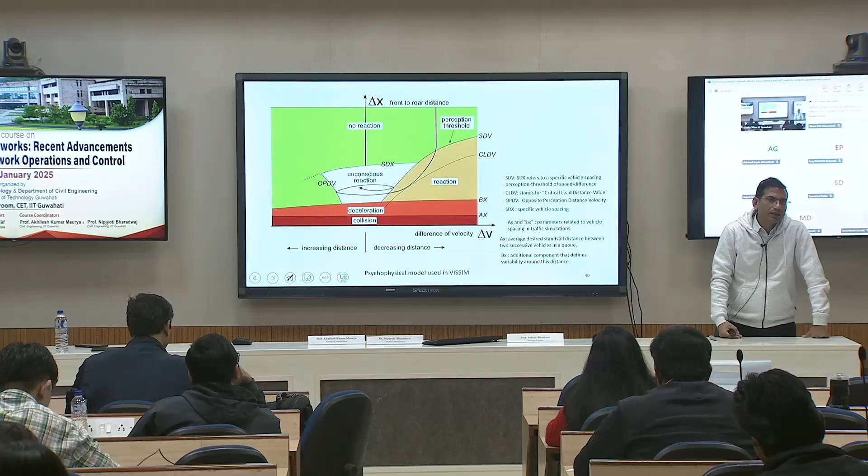If you want microscopic, then maybe time headway distribution or speed distribution or whatever parameter you want, you will calibrate and keep fine tuning these thresholds. Okay, so this is clear. So at least you have studied one model. Still you will not be able to run VISSIM with this. There are a lot of other things to study, but the philosophy of VISSIM is like this. Again, this we can skip.

Okay. That model is to figure out if the following driver wants to overtake, right? So I am talking about the car following model, where the assumption is that vehicles are moving in a single lane and following each other, they don't have the option of overtaking. So there is a separate class for lane change models.

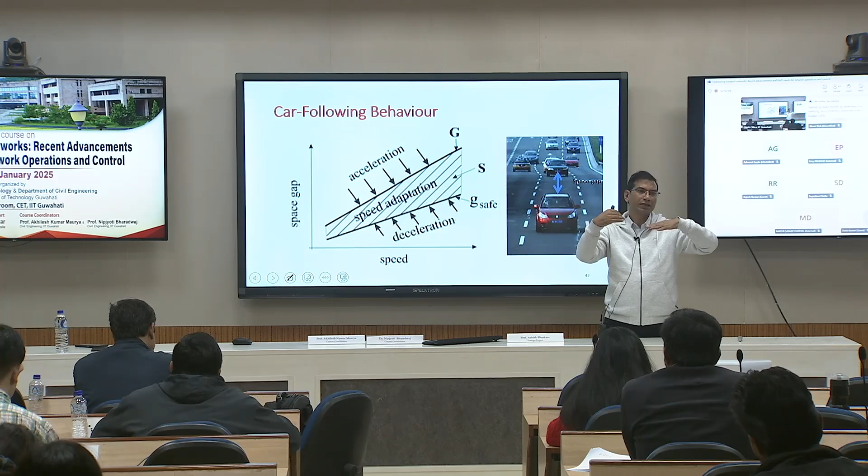So you add those whenever you are not happy with the leading vehicle and you end up in a situation where you need to decelerate. First you will check whether you are able to change the lane or not. Then the lane change model will come into picture. You will evaluate whether this is good for lane changing. If there is no vehicle on the side, you will switch.

So from the car following model, you will switch to lane change, and if that is successful, you will be in a different lane. Again, if the next vehicle comes in this lane, the car following model will come into picture. So car following alone will not be able to give you the entire traffic stream. So initially, if you remember, we had talked about two-dimensional.

So here these are one-dimensional. You are talking about only longitudinal interaction, car following. Intermittently or discretely you are changing lane through a lane change model. But in our case, where two-dimensional interaction is there, maybe these two models cannot be independent, they have to merge. So that we'll discuss towards the end.

Okay, we'll quickly move. Just one query. Yeah, please. Under which conditions is it good to adopt VISSIM and under which conditions is it not so favorable? Yeah, VISSIM is mostly good, but it all depends upon how accurately you calibrate. So if you are not able to calibrate properly, it will give you some junk values.

So if you are interested in microscopic parameters, then calibration has to be at the microscopic level. If you are interested in macroscopic parameters, then you can do it at the macro level. So it's not that you are calibrating for speed-flow-density and then you are trying to study time headway distribution. That is not possible.

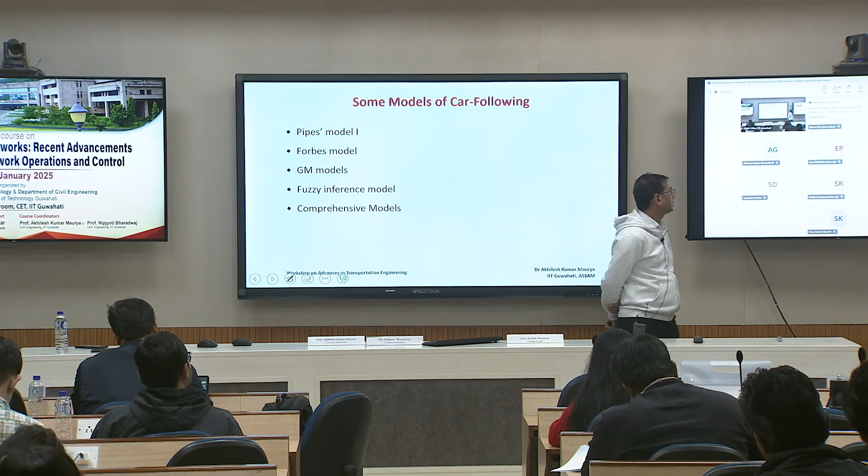So any other question from online? Recording, why are you starting recording? Just stop the recording. This MS Teams. Surya. So it's showing Nijamuddin has started recording. So recording should not be done here. Okay. So he is online.

Just check. Okay. So these are a few models which are very basic, like Pipes model, Forbes model, where it is very starting. So we will talk about a few of them, not the initial ones. The initial ones are very basic, where if two vehicles are there, the acceleration of these vehicles will depend upon the relative speed between two vehicles. These are very initial days, like in the 50s.

If relative speed between two vehicles becomes 0, it means that you will not react at all even though you have 500 meter distance, which is not realistic. If distance is large, you will still try to close in even if relative speed is 0. Then similarly Forbes, in a similar way with some sensitivity term here, but the formulation is same, the philosophy is same, that your reaction will depend upon relative speed between leading vehicle and following vehicle.

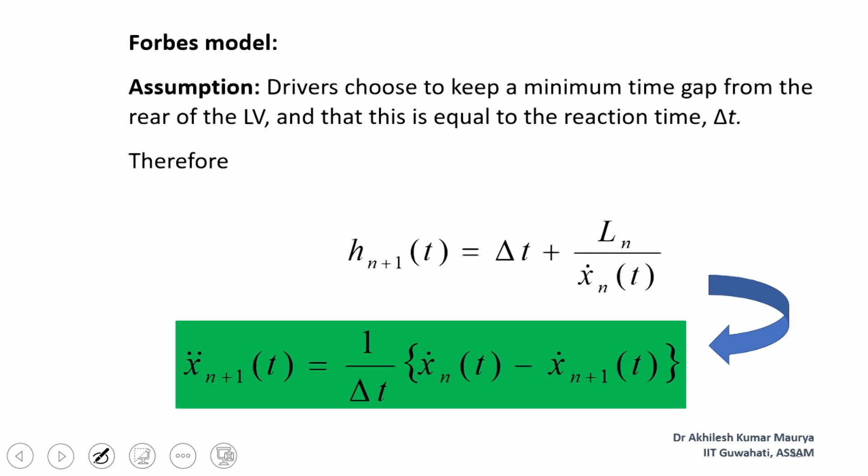Then afterwards, General Motors developed one model where they came up with a more detailed version, that vehicle action does not only depend upon relative speed, but it also depends upon relative distance. So if your relative distance is large, then your acceleration will be lower. No, it should be higher.

So this is his own vehicle speed they had added, and another major change was that they had added this delta t, which means that you will be reacting after delta t, even though you are getting data at time t. So you are measuring the relative speed at time t, but you are reacting delta t time later. Your reaction depends upon your distance headway.

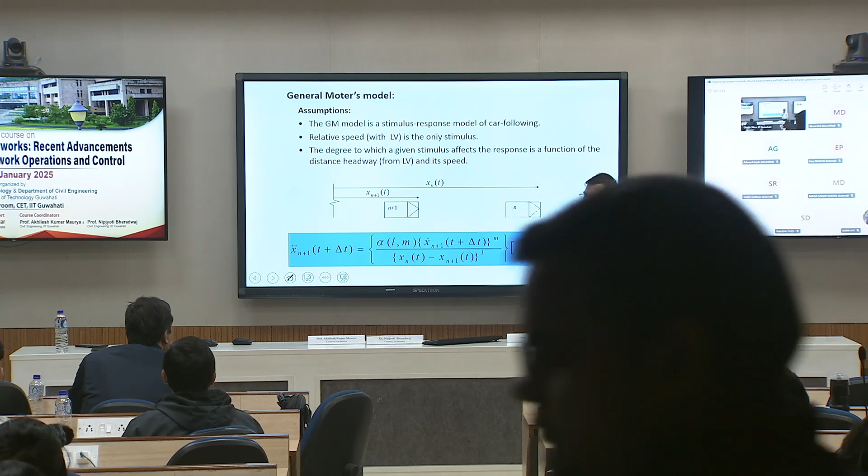And so if the distance is more, then your action will be less. And the more the distance, the more opportunity you have to accelerate. So your acceleration will vary with the distance; the more distance, the more you can accelerate. Yeah, but here the reaction will be lesser. This value is higher. So there is an L term there. L is always positive. It will not be negative. Otherwise, it will go in the numerator. Okay. So this equation is correct.

Somehow we are not able to get the correct context. So this is actually the sensitivity term, which is this entire term. So this actually governs how much impact this relative speed will have. If relative speed is 10, if distance headway is large, then this value should be higher. Something is off, so we'll figure it out. Okay.

Okay. So subsequently after that, a series of models came. Some are analytical, some are rule based, where maybe you have certain rules that, following through, they will be able to respond.

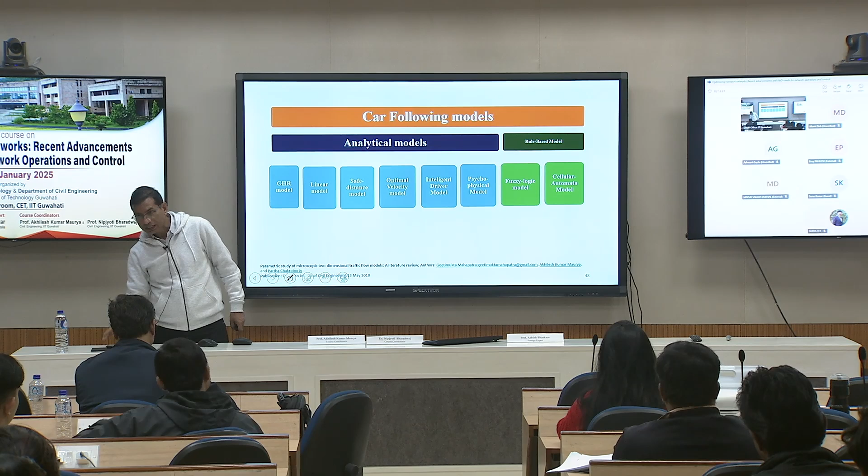So we will discuss how much time we have. So till 11 o'clock we need to finish. No? Yeah. So we will go less on this side.

Okay, we will discuss more on the comprehensive model, which is actually applicable in the Indian context. Some of these models were initially developed and then subsequently people tried to modify the equation to introduce two things. One is heterogeneity, because most of these models were initially developed for uniform traffic, assuming all vehicles are cars. Then they tried to see how different parameters will change if the vehicle pair changes. So that kind of modification.

Then some people also tried to see how this model will change if we incorporate the no lane discipline concept, where lateral veering is also part of it. Okay. So that we will see very briefly. So this is the standard way a car following model is represented. You have the leading vehicle, following vehicle, spacing, double dot means acceleration, single dot means relative speed, all those standard representations.

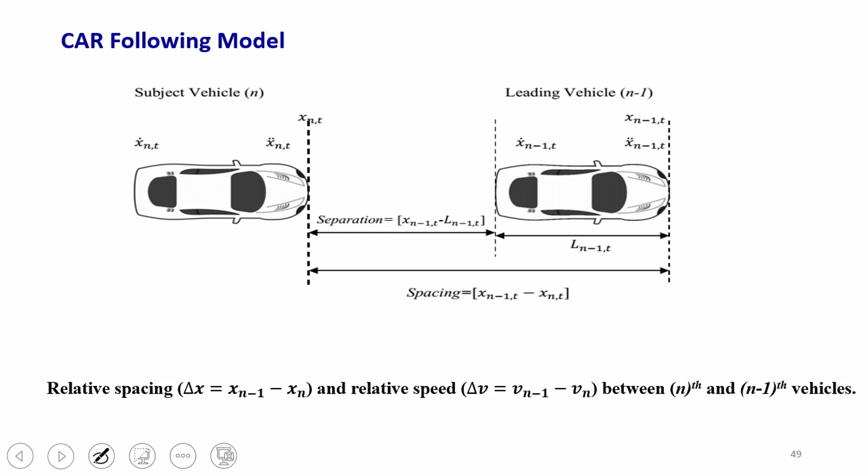Okay, so this is the GHR model, where acceleration of the following vehicle depends upon the relative speed and a term which is spacing and your own speed divided by a certain sensitivity term, which we had seen in the previous model also. Okay, so in the previous model there was a fixed value, but here alpha and beta you can choose in different combinations. So depending upon the combination, the impact of x, the gap, changes. If beta is 2, the impact of gap will be more. If beta is 0, then there is no impact of gap; it will be converted into Pipes model. So distance headway has no impact if beta becomes 0.

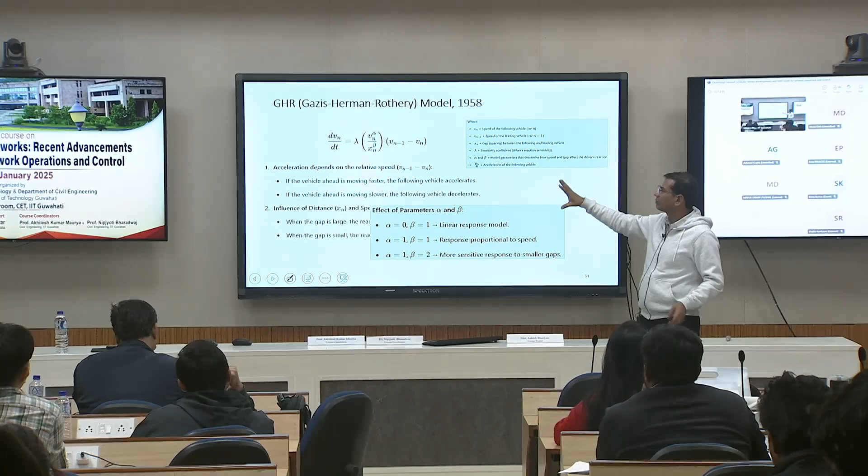Okay. So that way these models are more generic. If you keep changing these values, you will end up with different past models which were developed. Okay. So subsequently people modified it, added a few more parameter terms in order to make it more realistic. Okay. Then these are different classes of models.

Philosophically they are different. This is the safe distance model, that vehicles should maintain a safe distance which is equivalent to the vehicle length, that is the leading vehicle length; that much distance headway at minimum it should be. Then this is Vt. V means the current speed of the following vehicle and T is the reaction time. So this much distance, because before a vehicle reacts, this much time will be required. So this will definitely be a distance which is required to maintain with the leading vehicle.

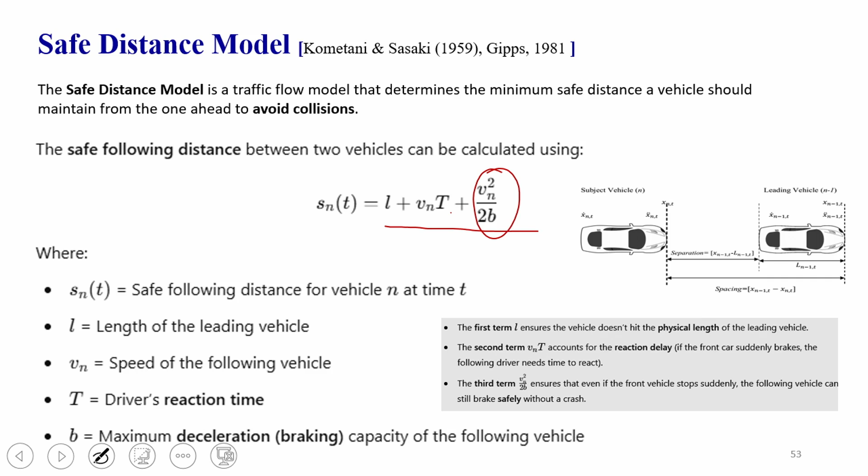Plus, if the leading vehicle is stopped, you need some space to travel before you come to a stop. How much distance you need to travel, that is this v squared by 2b. So you need to maintain this kind of distance headway with the leading vehicle, but this is slightly conservative. Every time you are assuming that the leading vehicle is going to perfectly stop, and that is not the case. So subsequently a lot of modifications came under this.

Then, with that modification, Gipps developed one model where your speed will be either of these two. One of the philosophical differences in these models: from the driver's perspective, how you react is you press the accelerator. Whether that governs the speed immediately, you control the acceleration. But many of these models talk in terms of speed. Ultimately, through acceleration you can convert into speed, but they directly relate with the speed instead of acceleration.

So here one is your free flow speed, the maximum desired speed, versus the speed which is governed by the current scenario. We will not go into detail. If the other impact is not there, you will have this highest speed in the free flow condition. In the other condition, forced flow condition, this equation will come into the picture and your speed will be governed by that.

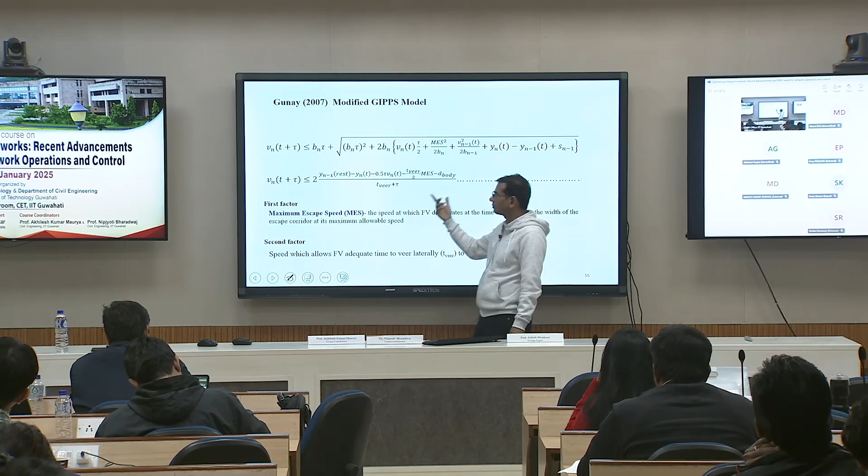Subsequently the Gipps model was modified by Gunay, which was a reasonable first attempt to incorporate non-lane discipline as well as heterogeneity. Here two terms were important. One, he talked about maximum escape speed. If a vehicle veers, meaning you are in car following mode, in Indian traffic you veer laterally and try to escape. So what kind of veering is required? If the veering required is large, obviously your probability of veering will be lesser.

And after veering, what kind of speed is available? If you veer and there is another vehicle, obviously in that case you will not veer. So the speed you are going to get after veering will also impact your veering. In these cases they try to incorporate both: how much veer is required, and after veering how much speed you will get passing through the available gap. Based on that they develop the relationship, and using the combination of both equations you can figure out your final speed based on that condition.

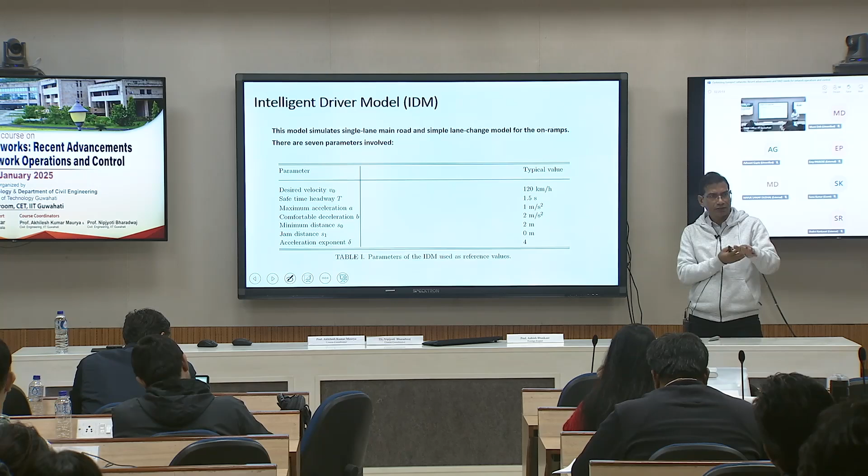If you read the Gunay 2007 paper on lateral discomfort, there are many details they had not considered. They had single mid-block data. But that was the first paper, I feel, that talked about lateral shifting and those things all together. Here there is no separate lane change model, because veering itself is like a lane change model. So that moves towards a two-dimensional model instead of a single direction.

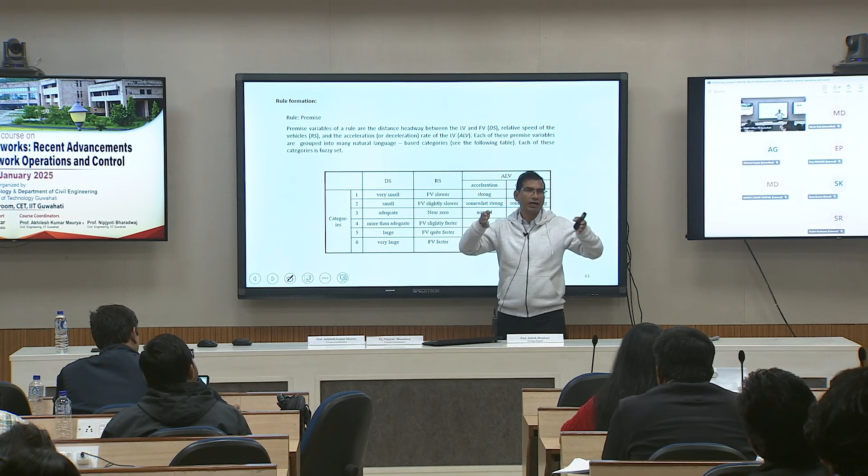Then this we can skip. Maybe we can go with the rule-based model. In rule-based models there are various different models. Cellular automata also comes under rule-based, where there are certain rules and based on that you keep reacting. Here, your distance headway is categorized into 6 categories. Your distance headway can be very small compared to the desired one, or very large. Say you want to maintain 1.5 seconds of time headway; the current speed multiplied by 1.5 becomes your desired headway. If the existing space is much larger, maybe 5 or 7 times, you categorize it as very large. So it becomes qualitative; instead of actual numbers, you divide into groups.

Similarly, the relative speed between two vehicles is also categorized into 6 categories. Near zero means plus minus 1. Why categories? Because they are going to use fuzzy logic, which has the flexibility that there will be some perception error. It will not be deterministic. For the same kind of situation you might react in two different ways. That is why, instead of actual numbers, they work with categories.

Now based on the combination of these, you react. This is the leading vehicle acceleration. If the leading vehicle is accelerating, they divided that into categories, and if it is decelerating, that is also divided into categories. Now take an existing scenario: if your distance headway is very small and the following vehicle is moving slightly faster, what will be your reaction?

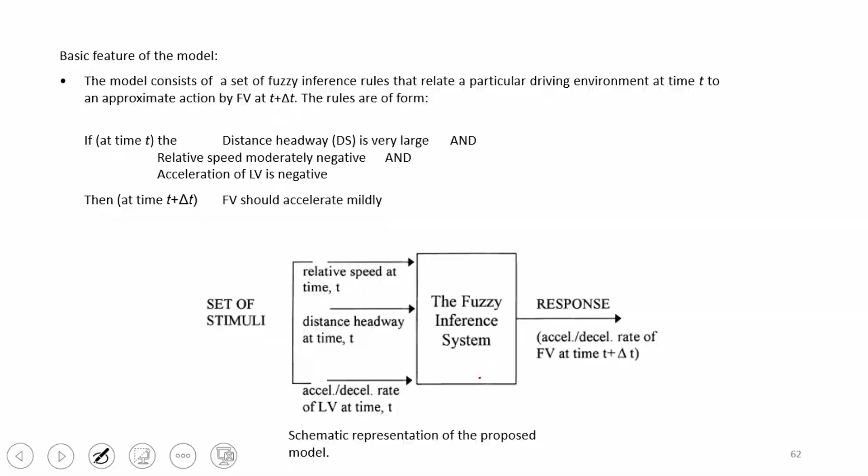So they built a rule base: at time t, if distance headway is very large, relative speed is moderate negative, and acceleration of the leading vehicle is negative, then you should act like this. Based on the existing scenario they figure out where it lies and keep executing that rule using fuzzy logic theory, where they define membership functions, some of which overlap. That adds a little bit of stochasticity to the prediction.

Okay, then this is an entirely different concept in modeling, the cellular automata model. Most of the time we deal with real numbers, like speed is 40.2 kilometers, distance is 3.6 kilometers. So while doing this computation in programming, you need to define these variables as real numbers, which requires larger space inside the computer. Integer versus real number, or integer versus float, their storage requirement will be different, and processing of integers is easier than processing of real numbers. So that was the basic concept.

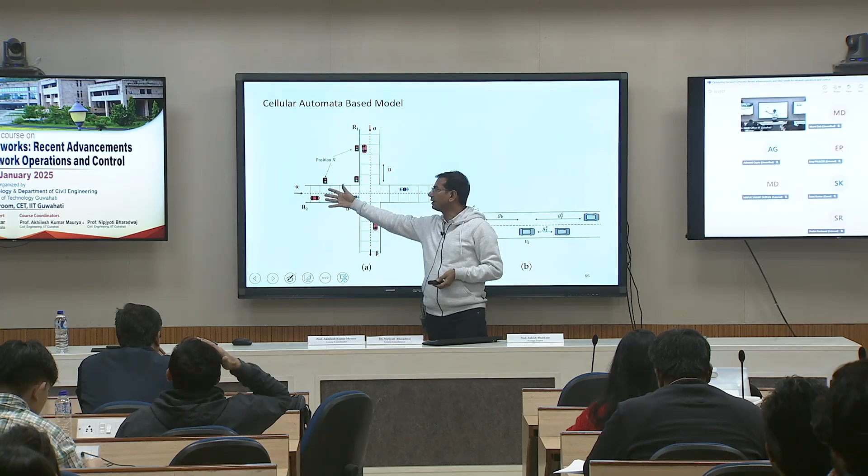They wanted to make the system more computationally efficient, because that was the major challenge: you had a realistic model but you cannot simulate a larger network because you don't have the computational capability. So how to simplify your simulation model in such a way that you will be able to compute faster? What they did, they assumed the entire road is a grid, and the grid size is such that only one vehicle can occupy one grid. So a vehicle will be either in this grid or this grid or this grid. It cannot be in between. That was the basic assumption.

So with that, they assume a certain grid size. Now because a vehicle can be here or here or here, speed also becomes integer: 1 cell per second, 2 cells per second, 3 cells per second, and maybe 5 cells per second represents 75 kilometers per hour. So one cell automatically becomes 15 kilometers per hour. Your speed also becomes discrete, either 15 or 30 or 45 or 60. So speed got discretized, space got discretized, and time, obviously this is a discrete model, at every regular interval we update the vehicle position. So distance headway will be 1 cell, 2 cells, 3 cells, everything becomes integer. Nothing is a real number, so computation becomes easier.

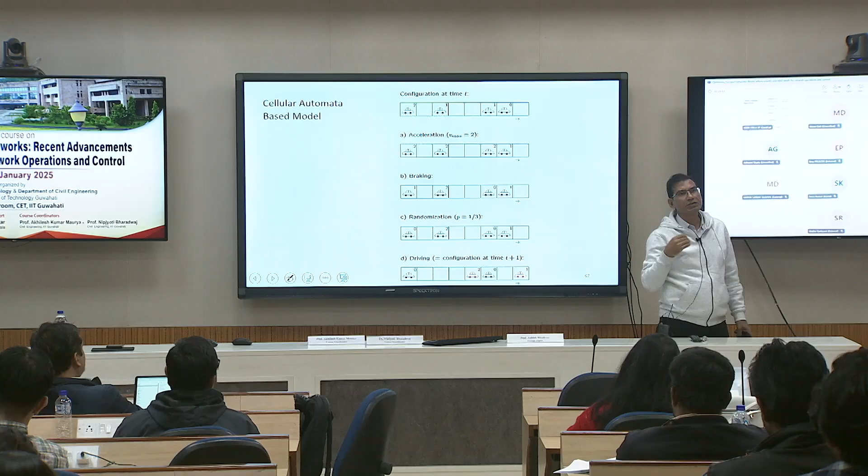So this is just one example. Currently this is the scenario where these numbers represent the speed of each vehicle. This first vehicle has speed 2, this has 1, this has 1; at time 0 you had this scenario. Now you want to see what the scenario will be after 1 second. If your speed is 2 but only 1 cell is empty, can you move 2 cells? You cannot. So you have to decelerate, and your speed should be only 1. Still we have not changed the position. We are just calculating whether the vehicle will accelerate or decelerate. So in this case, this vehicle will decelerate.

Here vehicle speed is 1, but the gap available is 2. So this vehicle can move 2 cells, because maybe the maximum speed is 5 cells per second. So it can increase the speed; this vehicle's speed becomes 2. It's accelerated. Similarly here, this vehicle speed is 1, but what is the gap? 0. So this vehicle will decelerate and its speed becomes 0. And this vehicle had 0 speed earlier. Now it has 1 cell, so it will accelerate and speed becomes 1. Now you have calculated the acceleration and deceleration of all vehicles. Now you will update the position. Okay, this we will talk about later.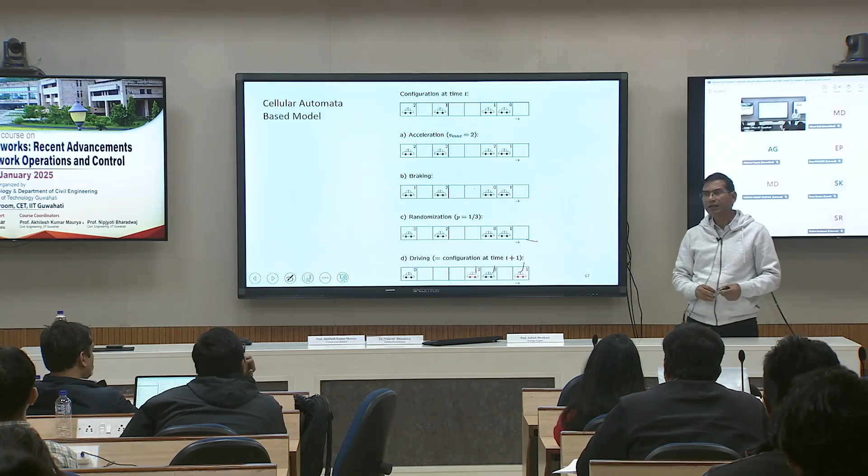So this vehicle speed is 1, so it will update, that got changed. This vehicle speed is 2, so it will move 2 cells. So now this vehicle is here. This was 0, so it will remain at that location. This vehicle speed was 1, so it moved 1. If they follow only A, B and D, this becomes a very deterministic kind of model, and everybody realizes that traffic is not deterministic, there should be some randomness. So they put in a randomness parameter, so that randomly some vehicles' speed will be changed for no reason.

So assuming that some drivers might overreact or underreact, but not all drivers. So maybe with 30% probability or 20% probability, you will keep varying and try to match whether your outcome matches with the realistic data or not. So here 1/3 means out of 3 vehicles, 1 vehicle's speed will be randomly reduced by 1 step, not at a higher step. So here it was 1, it becomes 0, then this vehicle remains here. So that way you will keep updating the vehicle position using these rules.

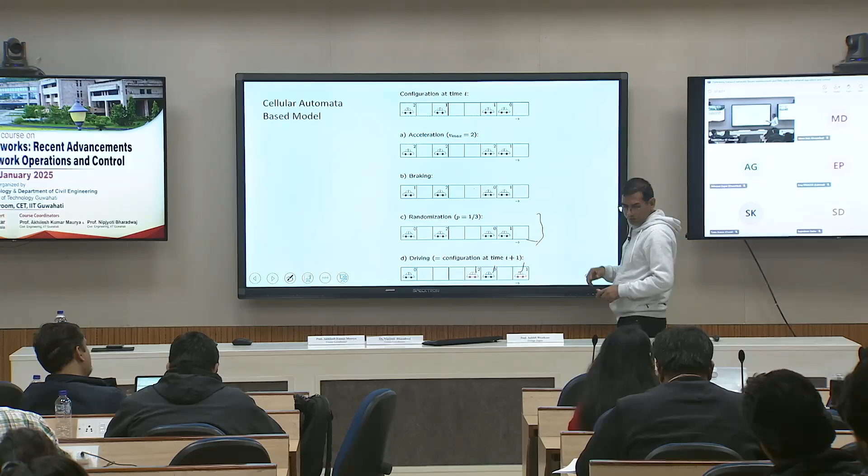So this is basically cellular automata, a physics-based concept. They applied it in traffic movement, and it became quite popular at a time, maybe around the 90s. Subsequently, the major challenge was that speed will be 15 kilometers per hour, or the next speed will be 30. In between there is no speed. Similarly, position will be at 0, or if cell size is 7.5 meters or maybe 7 meters, it will be 0, 7, 14, that way.

So people further divided these cells, horizontally and vertically, in all directions. Initially width was 3.5 meters and length was 7 meters. Now you can have even a smaller two-wheeler. They further divided it in such a way that even a smaller vehicle can occupy just one cell. A bigger vehicle can occupy multiple cells, but they will never be in between cells. It will be an integer number of cells, so if a car comes, that car might occupy 4 cells instead of 1 cell. Processing is still in terms of integers only, but this is more realistic.

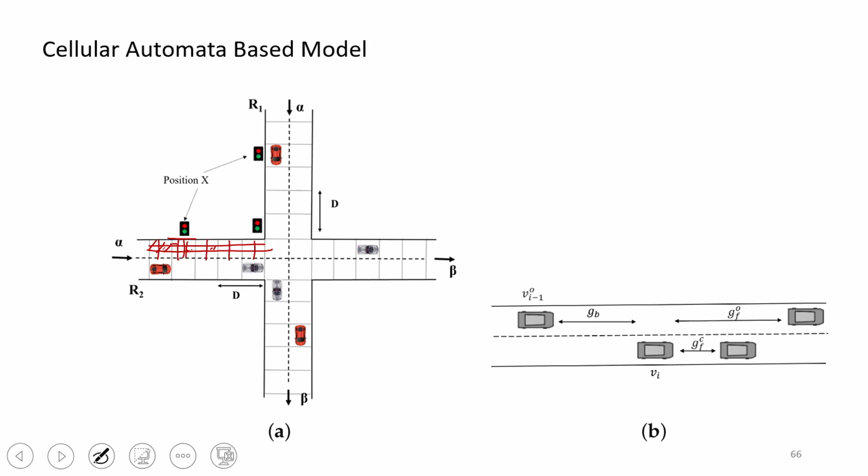Now the vehicle will be moving 1 cell, and what was 7 meters is now divided into 4 cells. Now you can represent even 2 kilometers per hour speed. So multiple such modifications happened, and people parallelly developed the lane change model as well. The plus point of these models is that they have low computational requirements. Their capability is very high. You can simulate a larger network very easily. So any question on this?

What was the actual problem over here? Because other models can still do this, right? So what is it about the computational power? There are different philosophies, and computational power was definitely a challenge in the 90s and 2000s, because if you wanted to simulate a larger network, you had a challenge. Your simulation will help you forecast only if you are able to simulate a 30-minute scenario in less than 30 minutes. If it takes more than 30 minutes, then you cannot forecast.

When you said subdividing into smaller grids, this is not finite element, right? You are still representing a vehicle as n times of that? Yes, only n times of that. Now instead of vehicle length being 1 cell, it might be n cells. With that, you are able to incorporate heterogeneous vehicles. Earlier all vehicle sizes were equal to the cell size. Now one can be 2 cells, one can be 3 cells. And lateral shifting also, earlier it was only in terms of 3.5 meters. Now you can have 1/3 of that. So basically you made it more realistic. So you created more classes in between.

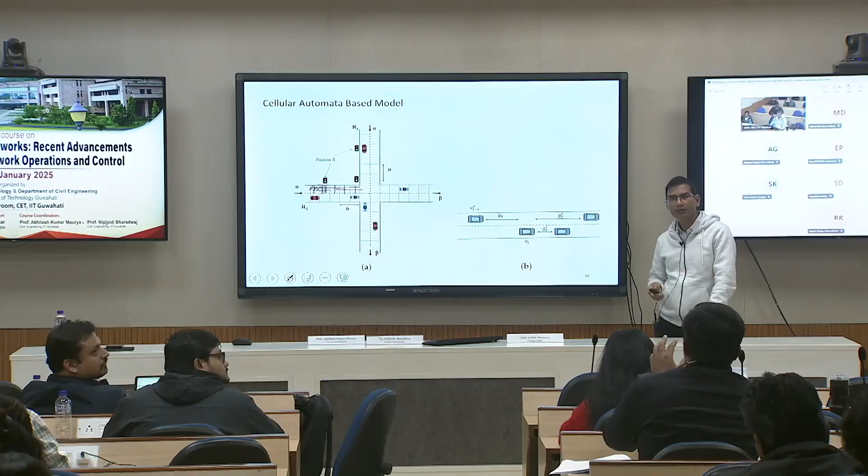Let us take one city and one intersection where 70 to 80% are two-wheelers, and cars as well as public transport remain the same. So can we use these kinds of models? There are models, but they had their own challenges, because how do you get that random parameter to change the speed? If you cannot get this from the field, you need to fine-tune. Then, whatever cells you are dividing, to get more accuracy you need finer cells. As soon as you have finer cells, your computational efficiency will go down. So between accuracy and computational efficiency, somewhere you need to compromise.

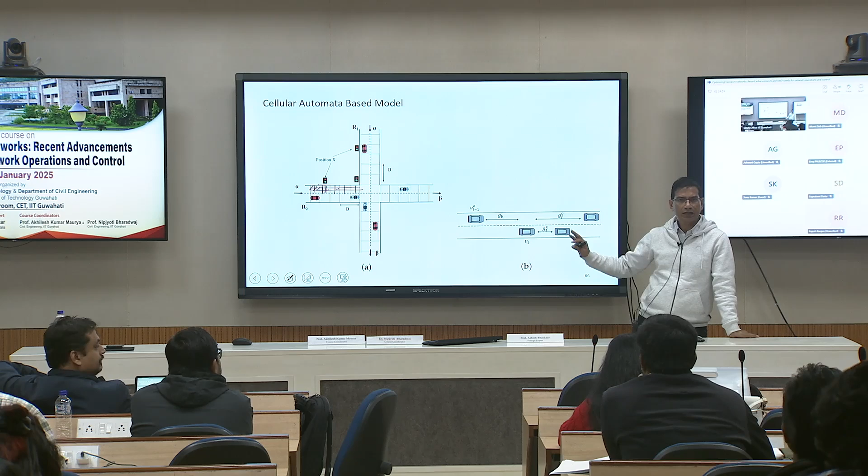Every philosophy has its own limitations, so here also there are a few limitations. We will not go into detail. If you see how cellular automata models have been developed, you will see a series of developments. And cellular automata has a large application in multiple fields. Even in music people have used it. If you had different bits of music pieces and just randomly mix them, you might create some kind of new music. And if you mix with certain logic, you will be able to create new music without doing much. So there is an entirely different philosophy with cellular automata used across areas.

So then this is another model which had quite a lot of potential, but a lot of computational power was required. That's why it's not working. So we'll talk only about the philosophy of this.

So it will go to the hill and come back? No. It flows gravitationally, but through valleys only. It will not go to the hill unless the water level goes up, and then maybe it might go over some of the small hills, but obviously not the bigger one.

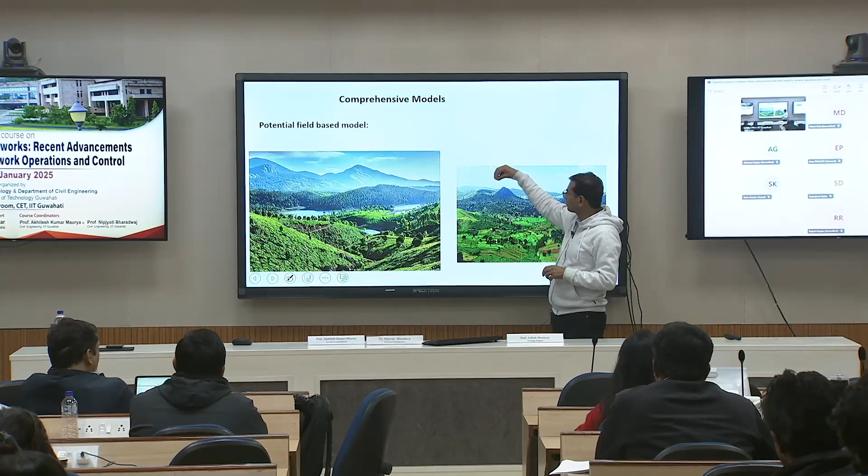So what these hills are, basically you can assume that they are a threat or resistance against water flow. So higher the height, higher the resistance. So water tries to minimize the resistance so that it can flow efficiently. Okay. So try to visualize this same philosophy on a road. So on your road, these edges are the hills.

So you create such a function which has a very high value, so the vehicle will never go out of it. So this is one road edge, this is one road edge. Now the vehicle has to move in between. So these kinds of function you can create, and then whatever vehicles are in between, you can also treat them as a hill, but a moving hill, because a vehicle cannot go over it.

So you have to create that kind of height or resistance so that the vehicle in no case minimizes its flow summation by moving over it. But now if you consider a pothole on the road, it is also some kind of resistance, because generally you will try to avoid it. So depending upon the size of the pothole, you can create a hill. If the pothole size is small, maybe a small hill. So once you move over it, you need to pay a cost, you need to reduce your speed,

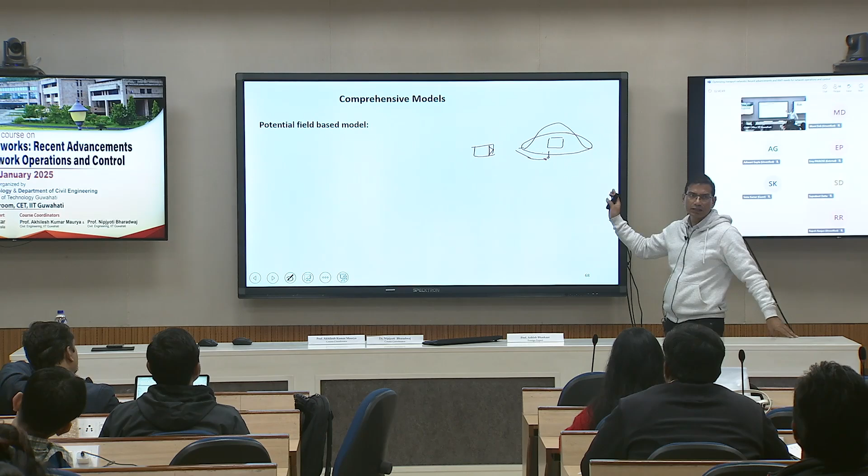This was developed by Professor Partha Chakroborty at IIT Kanpur, around 2002 and 2004. But it was not worked on in the future because it's just not possible. There's a lot of maths involved and a lot of calibration is required, and for this calibration you will not get any data from the field. Everything is hypothetical. Okay. So this has all the steering concepts. Here you have not only directional movement but steering also together.

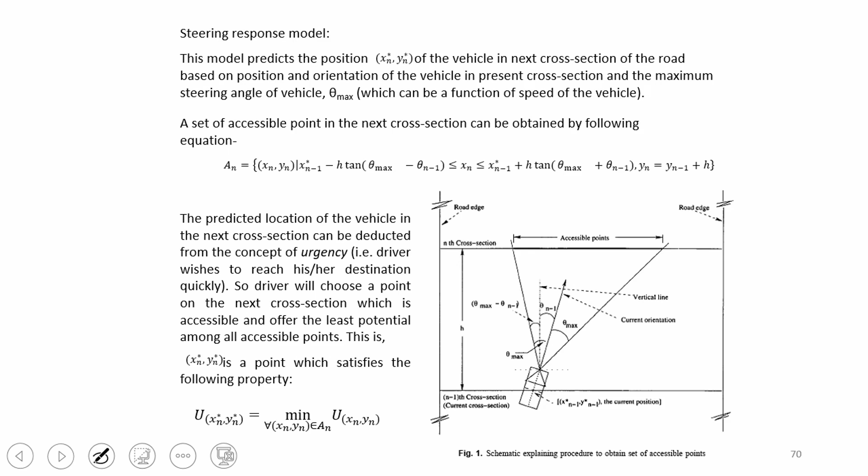So that way it becomes a 2D model. You are not looking only in one direction, you are looking on the side also, that if we move in this direction, how much resistance we will gain. And you will add up all the resistance: within your steering angle capability, what are the different paths possible. Against all paths you need to calculate what is the resistance. Whichever path has minimal resistance, that you will adopt.

Okay. Okay. I think that is the last one. Okay. Any question in this? Okay. So otherwise this will be the last slide.

We'll talk about this update scheme, because if you see the cellular automata model, there is sequential and parallel update. These two terms you remember, we will go to that cellular automata slide. So in all simulation models, basically we do that. We calculate the reaction of each and every vehicle and update the position after delta t time step, or if you consider 1 second, you update that. So now in updating, you can do two ways, sequential or parallel.

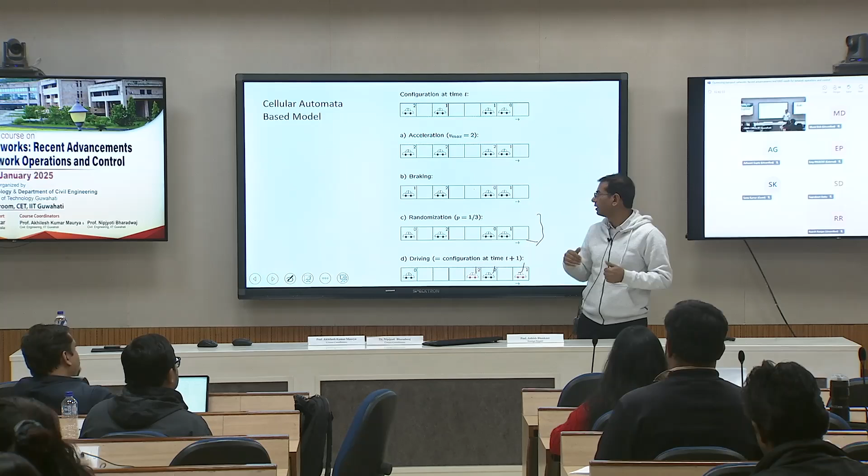So here, if we calculate for this, it becomes 1. So we can immediately change the position, or maybe we will start from the leading vehicle first. So if here the speed is 0, it becomes 1. So we can immediately switch this. That is, before calculating the next vehicle, we can update the position. So then this gap becomes 1. So this speed, instead of 1 becoming 0 here, it will remain 1, because now this vehicle has moved to this place. Okay,

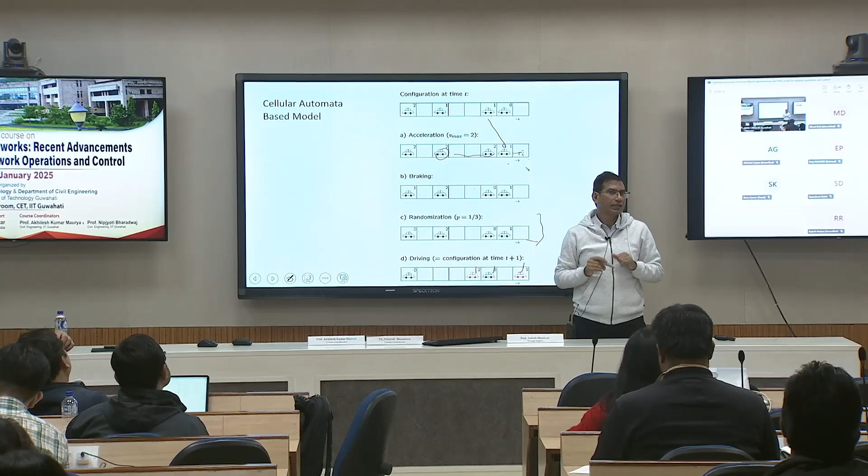similarly in this case, because this vehicle moved to this place, now before we calculate for the third, it has 3 gap. So that becomes sequential update, where you are calculating reaction, updating, calculating reaction, updating. So this is one way. In the other case, we calculate for all with the existing scenario and we update altogether. So this is parallel update. So which is closer to reality, that you need to decide, whether it is sequential update or parallel update.

No, time is same. Time is same, maybe slightly more computationally efficient. You need to calculate updated position every time. So here the question is, which is closer to reality? Why? Because that replicates the perception or behavior aspects also. Okay. Anybody else?

So here, once we are calculating for one vehicle, we are assuming all the vehicles are just sleeping, they are not doing anything. That is not happening. Every driver is acting simultaneously. So it's not that if the leading vehicle is not acting, the following vehicle will not act. Everybody is independently moving and updating his position. So this parallel update becomes more practical.

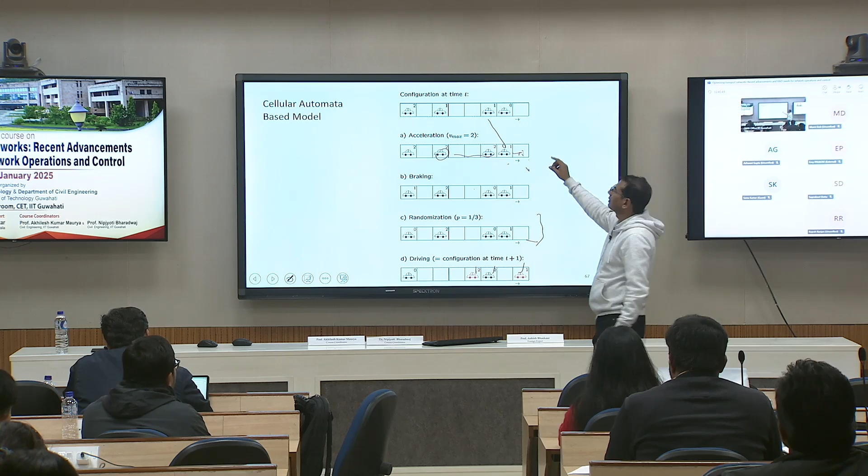So in the majority of cases, parallel update is used, but initially there were a few models which might be using sequential update as well. So both have plus and minus. If you make the time frame of update very small, 0.1 second or even smaller, then both will give more or less similar results. Okay, so any question? Otherwise, we will stop here.

So all these models that we have presented can be used only for VISSIM or other things? No, VISSIM has only the psychophysical model. That is one. Every software comes with a particular philosophy, which follows a particular model. So the VISSIM model is called the Wiedemann model, which is based on the psychophysical model, but the researcher's name is Wiedemann. He has 2 different models and those are available in VISSIM. Similarly, AIMSUN might have a different model. All other software has one underlying specific model.

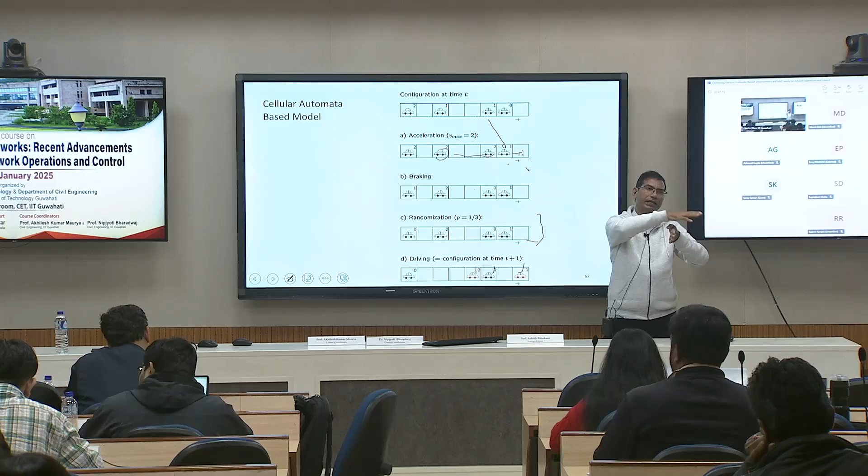Okay. Do these models accept external data? If I give data from multiple sources, can they use it? Data can be used. If you have vehicle position or flow values coming in, you can keep running this model and feeding back. It's like Professor Bhaskar explained yesterday. You are getting the data, using your model, predicting and putting back in the system. That is how you keep updating your signal timing and many other things. Okay, then thank you. Although we have not talked about any specific model too much, I hope at least you got the philosophy.

Okay. Tea break, right? I hope so. Okay. Surya, just see whether tea is there. Okay, so we can take tea break.